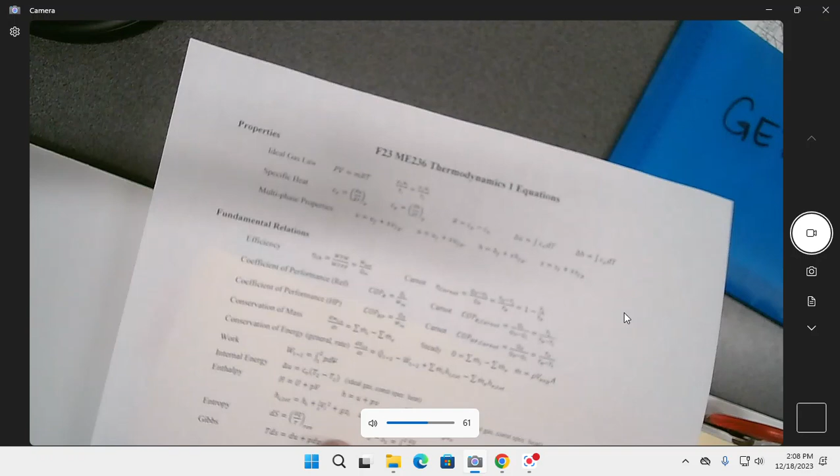So this is what I'm referring to right here. In enthalpy, we have H is internal energy plus this PV term right here. And...

We don't really, we just call that a type of work that's taking place, like flow work sometimes. So for an open system, we go ahead and use enthalpy because it's internal energy plus this other thing that's taking place, pressure times that volume change. It's trying to put it into other terms beside what I've already stated right there.

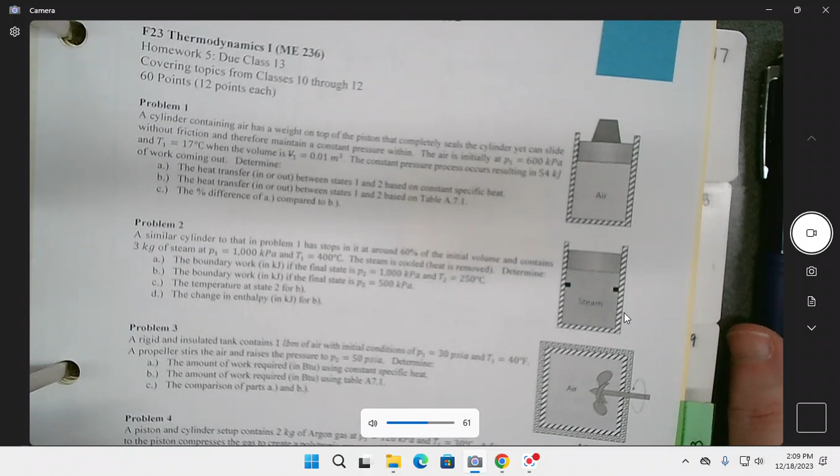So if we go back to, I actually put these up here for a reason. Okay, so I'm going to jump to homework 5. So homeworks 5 and 6 - I tested on some of these on exam 2, and we could also go over exam 2 if you'd like. Might be a useful portion of our time.

But these are all closed systems. You wouldn't use enthalpy for any of these. You'd use that first law, the closed system first law right there. So make that big enough right there. Change in internal energy is going to equal the heat that's being transferred minus the work out, right? So there's heat in and work out by definition in terms of their signs.

And here's the end state and the initial state, and that's true for all of these problems. So when you recognize that, it's part of the problem being this type of nature, you go through that. And then I just did a problem like here.

I didn't have a single person approach this problem correctly in homework 9, I think - maybe it was homework 10, it was where we were doing the generation. Do you recognize what's special about this problem, about what happens here?

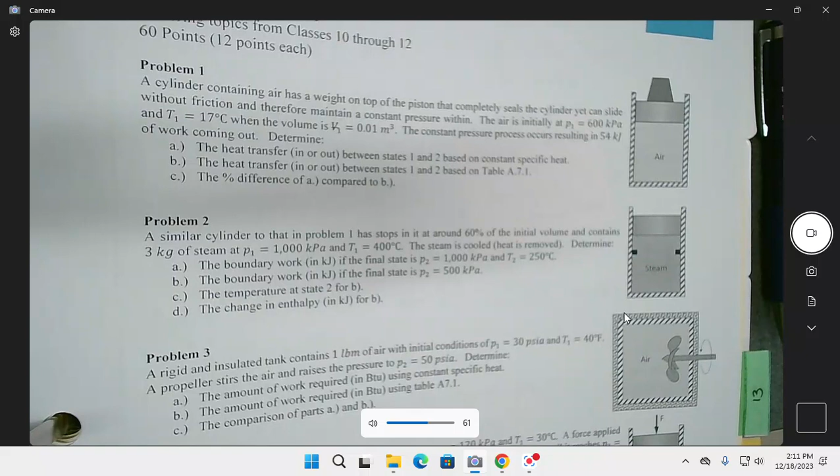That's got to be 2 stages - this piston falls down. Because the piston's there, it's free and it weighs something. We don't know what it weighs, we don't care. We could set it up so we would have to find out, but we don't know. What it does is it causes a constant pressure because its weight is the same all the way as it's moving downwards. It could be that you were holding it and then you let go and the thing starts rising up, but almost all these problems are that we were holding it and let it go, and its weight causes it because it has the same force, the weight doesn't change, and it's got the same area, so it's got to have the same pressure, right?

I hope that, because there's been lots and lots of problems like that along the way, like the same one with what it looks like up here. But now it's got to stop, and so it comes down to right here, and it hits that, so it was a constant pressure process till it gets there. And now if something continues to happen to it, it's a constant volume process. So you've got to do it in 2 stages, right? That was something I thought we did enough of that people would see, but so.

And when I'm writing an exam, I am not going, this will show them. I am like, I want to see if they're able to do this. Like, can they demonstrate their ability to solve a problem right here? And when no one solved it yet, I want to say, hey, don't do that, and then measure it again, right? So if I was going to tell you, I haven't made a decision, but I'm telling you how my brain works. You don't really want to know, but yes.

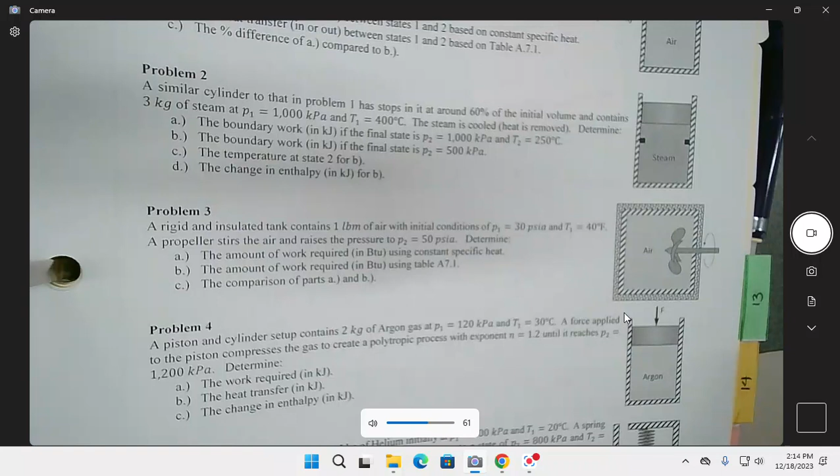But yes, it's pervasive. It's everywhere. So that's my reasoning for the U.S. units, but I won't try to mess with you too much because U.S. units, as I agree with you, they suck. No way around it.

A problem like this, that linear spring in combination, is not a constant pressure problem anymore because the force of the spring changes as it moves down or up. And therefore, it changes the pressure versus volume into a linear pathway. Right? So we're looking at processes all the time. That process isn't really on here, but you could have a linear process between pressure and volume. That's not too bad because usually you could just think of it as the PV diagram and find the area underneath the PV diagram.

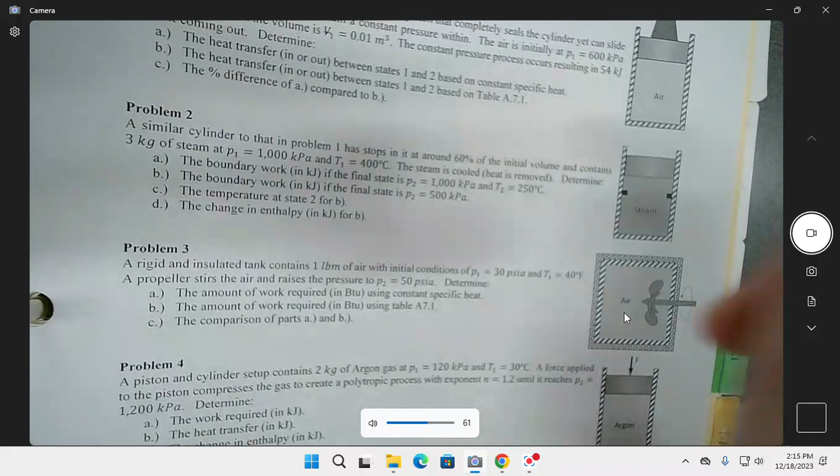Thinking through the TS process would take a little bit more effort. We're not going to go beyond the scope of what we've done in the homework. Well, except to say that we didn't do every single combination of these things that are possible. But I'm not going to try to go too crazy on reinventing some new damn thing at this point.

All right, so compare that homework, which is 5, to homework 6, which I labeled here. And here, if you remember, I wrote out a list of the different things. And these we might think of as open systems. And those open systems are covered with this right here. And then sometimes we extend that total right there. It's not all the time, but only when the magnitudes of the other components are large enough, as we mentioned before, to have the velocity involved. And generally speaking, we're not going to worry about the potential energy changes, not a lot.

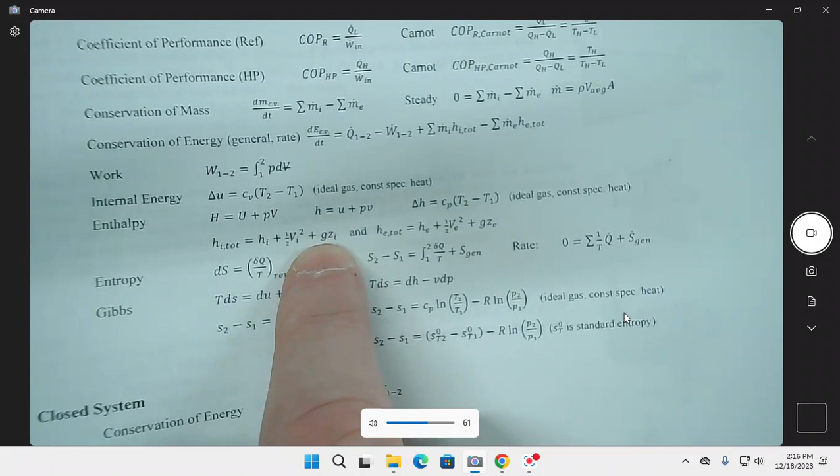And we've even had some problems where I think I showed that the velocity was just a tiny fraction of what the thing is. So most of the time, we write this down right here, and we don't include the velocity in there, unless the velocity is really large and is sort of the point of the thing. So that might be true for a nozzle or a diffuser, right?

So the nozzle or a diffuser, generally, this one's going to be much larger than this one, and it's by the square, right? It's velocity squared. So the velocity might matter right here, and the same thing is true right here. But it might not even matter here, and a lot of times for diffusers, they just say this one is so much larger than that one, so we just don't even worry about it, right?

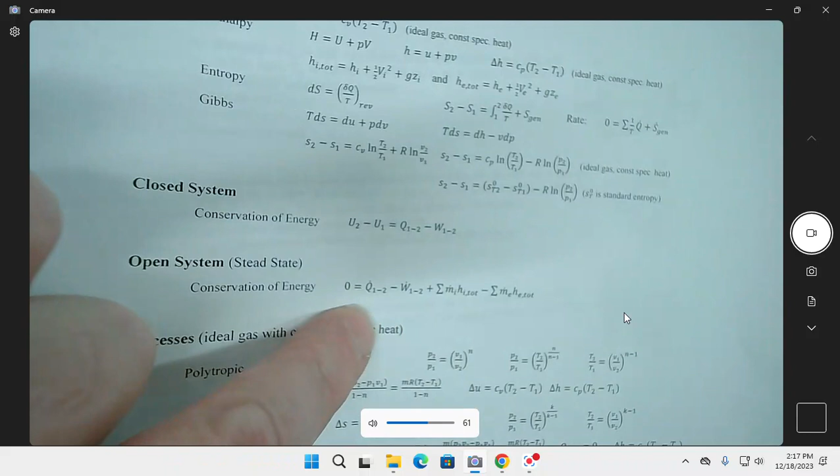But this is the main equation right here that we're going to use when it comes to these pieces of equipment. Velocity might matter here, except that most of the time for a throttling problem, we'll pick the points far enough away from where the velocity got really high so that it doesn't matter.

And then the idea most of the time for a throttling process, and I'm bringing this up because it will come up again in Thermo 2, you'll have different pieces of equipment, especially in a refrigeration system. The valve that makes it go from being a high pressure liquid to a low pressure gas is a throttle. And that throttling process is really important. But it's an isenthalpic type of thing that you'll find later on. And then heat exchangers, but we pick those up in the next one, right?

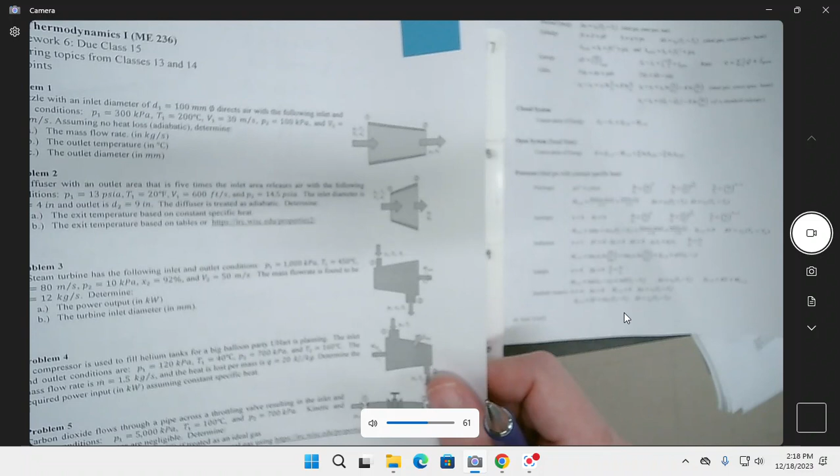So 4 is important. Homework 5 is important. They're all important, but focusing on 5 and 6. And those are what exam 2 was really mostly about. I think also we had some stuff on homework 7 as well. Yeah, we had stuff on homework 7, so so far we have 5, 6, and 7. Those homeworks being very important.

Once again, here's another heat exchanger. I don't think I asked you about a heat exchanger. I'm tempted to ask you about a heat exchanger problem. I don't know if I asked you about a mixing problem. They're not as important to me, but this can be something. You'll get a lot of stuff in heat transfer with the mixing problems and that kind of thing. But you'll dive in and figure out what's taking place inside here.

We also did cover, I just want to mention, heat transfer, which I think was one problem somewhere. And I'm not asking a purely heat transfer problem with the coefficient of thermal conductivity and that type of thing. That is the class heat transfer. It covers a whole lot.

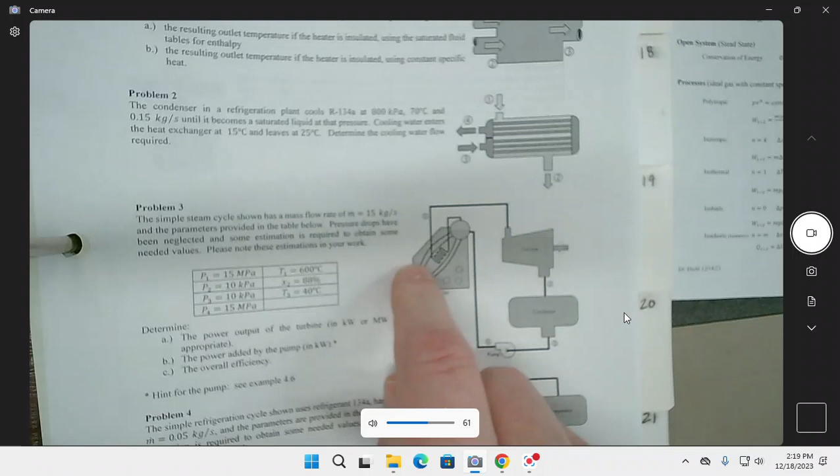Not sure if I'm doing a cycle or not. It'd be good to be able to do this, but of course you're going to go into these, like a steam cycle and a refrigeration cycle. I did notice that people got confused. I'm jumping the gun here. I was kind of surprised how many people, when I asked you for the Carnot coefficient of performance, wrote down the thermal efficiency. Big difference. So let's make sure we cover that. So I probably will ask that. I'm jumping ahead a little bit, but that is something related to this.

I don't think I'm going to ask anything about these problems right here, which is like a transient problem. This is sort of like a combination of this one and this one right here, but mostly what we end up doing is this type of thing, even though there is flow going on there. So it sort of belies the thing I just said before, but not a lot.

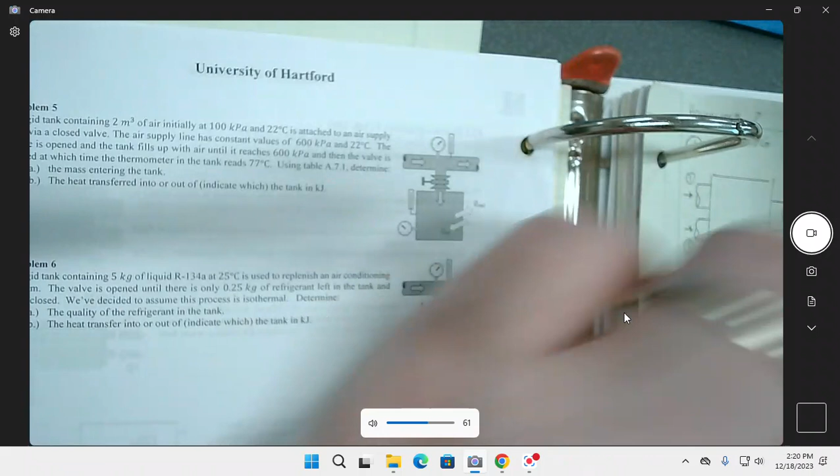Homework 8. All right, so here's one where we start. This is stuff that was after exam 2, and these were supposed to be pretty easy questions, right here.

That's out of focus. I hate that. This thing doesn't focus well. It doesn't have a button to hit focus.

Where I'm just taking the high temperature and the low temperature, like the high temperature here and the low temperature there, and finding what the Carnot efficiency is going to be, and then using it backwards. I think people did okay, but here they got a little mixed up on this one, where we do the coefficient of performance instead. They're similar, but they're different.

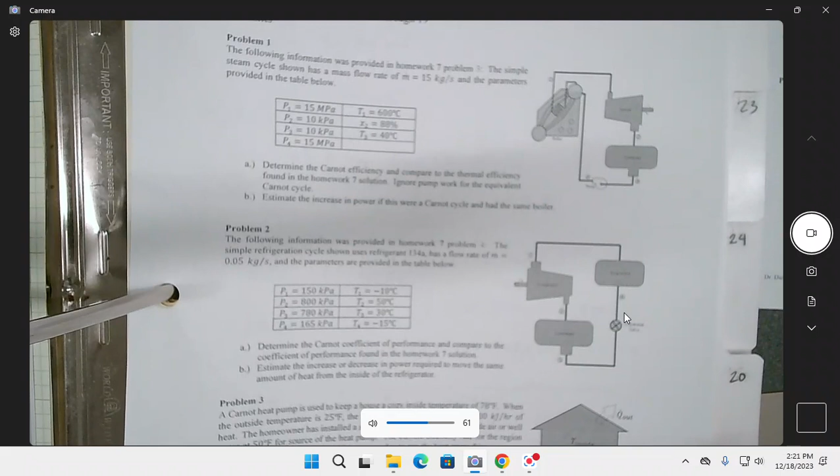And then I thought this was a really good problem, and only a couple people got in the range. But the selling point of this is where rubber hits the road, real practical kinds of things. This isn't the kind of question eggheads ask that nobody will ever use.

This is something that you'd really want to know if you were going to try to save some money on your house heating. You go, okay, here's how much electricity costs, and here's how much power you would use trying to take heat out of the outside air. How about digging a well instead and drawing it from there? You could save some coin.

It was close to half, or maybe it was even more than half of the money. And I also say this is like $1 per day kind of thing. People were like, wow, I don't know, you guys need to pay the heating bill at home or something. Some of you think that you paid $28 a day to heat your house, and you're going to go broke. You'd hope it would be in the $2 or so a day range. It's a lot of money anyway. But it's also a good learning experience: if a numerical result that you get doesn't make any sense, you probably did something wrong.

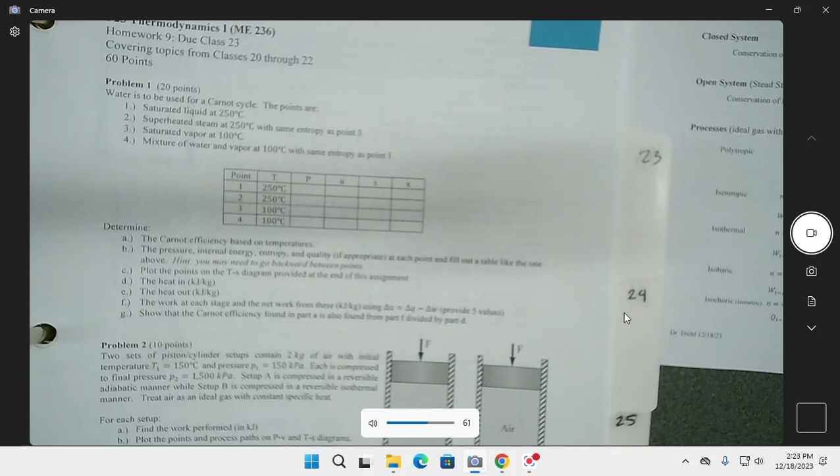Here was some entropy generation. I think I might include some entropy generation on there. I took a look at Dr. Yeverster's final exam. Must have been a take-home exam, like way longer than mine. But some entropy generation things, which is more like homework 9. Well, no, this is homework 9. Yeah, so we could go over some of these or some ones that are like these.

It's hard to pick out some problems out of the book. I spent a lot of time picking and writing these problems so that they wouldn't be impossible to do, but they also wouldn't be one line. There's no partial credit in a one-step problem. You either get it or you don't. So anyway, is any particular homework problem jumping at you that you'd like to see? Have you looked over your homework problems and gone, I just don't see why I didn't get that right?

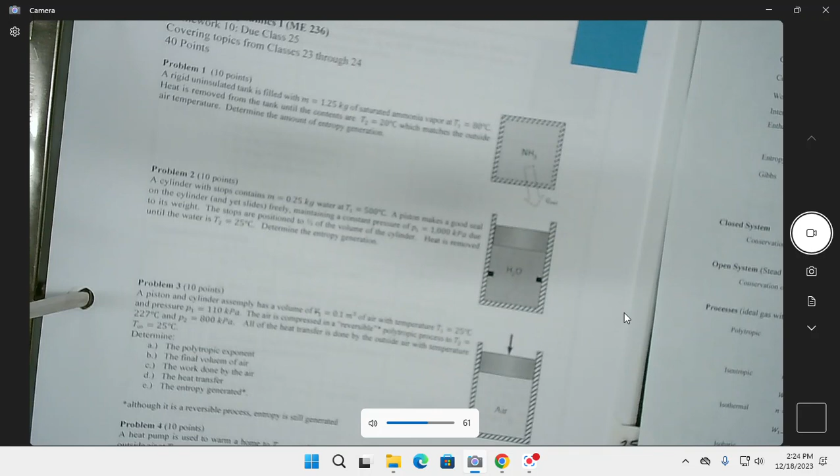Okay, do a Carnot. Can we? You want to do one of the ones out of here, or ones out of the homework? I guess we'll just take a look at what we had as the homework. There's a particular homework I'm going to look at. So let's take a look at all of these really quick. This is homework number 8. So let's see what I do with the time. Did I waste a half hour? Probably 20 minutes.

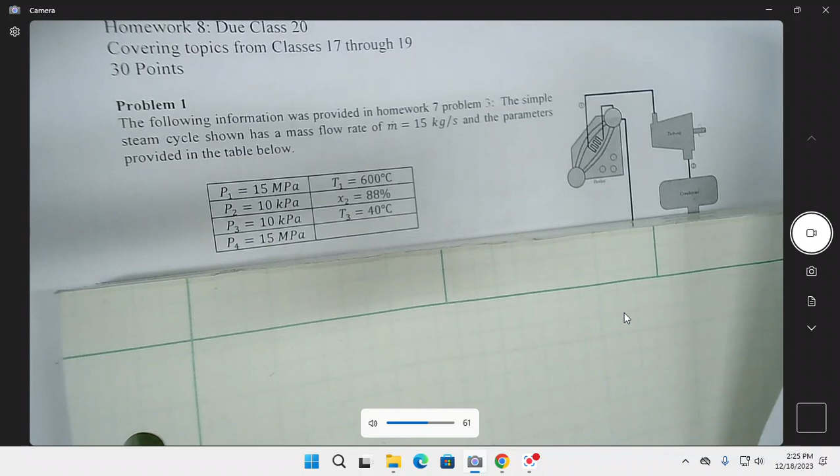All right, so what we had was a steam cycle, and I reminded you of the pressure and the temperature. But remember the main equation for Carnot efficiency. I thought I put them in here. Yeah, there's the Carnot efficiency. It's still going to be what you want over what you paid for, and that's work net over Q in. That could be dotted, or it could be a lowercase w and lowercase q. It doesn't matter; if you had the same mass flow, it would be the same thing.

But for the Carnot one, the work is really the difference between the high temperature and the low temperature. So that's actually the same equation, except now we use the thermal equivalence, so we call it a temperature scale. By the way, homework problem 1 on homework 9 really demonstrated that this works. In part A, you just jump to this equation, and the algebra works out to 1 minus the low temperature over the high temperature. Make sure this is in Kelvin, or Rankine if you're in U.S. units.

Then I had you go step by step through the isothermal process, isentropic process, isothermal process, isentropic process to complete the square, the little rectangle. And I even gave you a little piece of paper to do it on. I don't think a lot of people scanned that and turned it in, but I decided not to take points off for that, though it was in the instructions. Anyway.

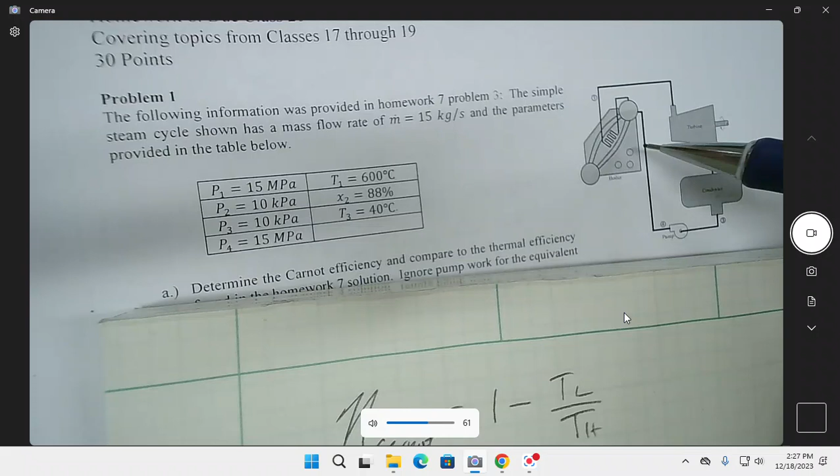We're not as efficient when we go down closer to the equator. But during really cold winter, we get a more efficient plant. You can't really tell, but it is. And then we have the high temperature right here, which is going to be right out of there. So you're just going to be 1 minus whatever that is, 40 plus 273.

I'm sorry about this. Let me pull it back a little bit. There you go. And then the 600 plus 273. Oh, that's what I was going to do. I meant to grab my calculator instead of this stupid thing. 40, 273 plus, and then 600. I should be able to do that in my head, huh? 273 plus minus.

Yeah, so we're potentially, let's see if I can get this even right here. What's like 64.1%. And I didn't do a very good job of that either. How do we do that?

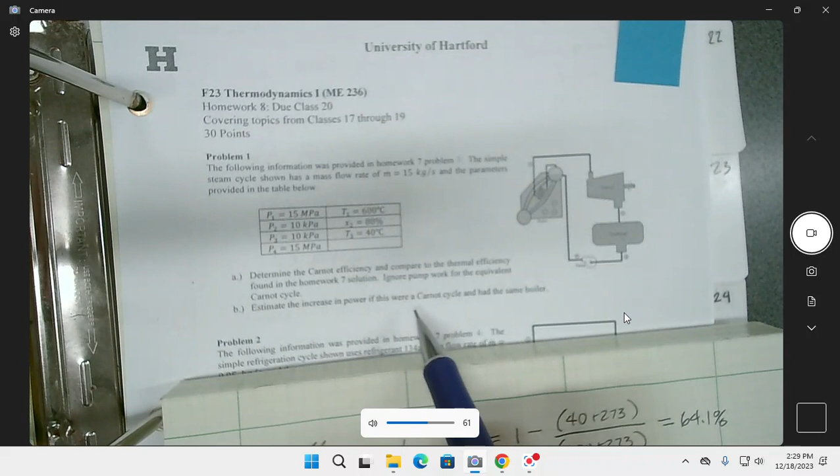Okay, and it was also asking, estimate the increase in power if this were a Carnot cycle. And I think the power that I got out from the previous problems, let's see, I'm going to start taking these pages out because this is awkward. From the previous homework. Let's see, so remember in here we had the overall efficiency. We were asked for the power of the turbine, right? So we had 2.06 kilowatts is how much we would have gotten out before.

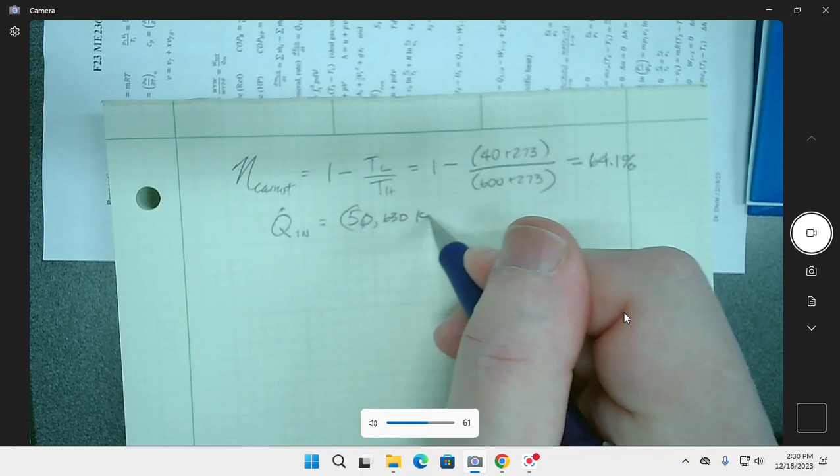And the amount of heat that we put in, if you recall from back here, from the boiler was 50,630, right? So, second, I should have just taken all these out. So the heat in from the boiler was 50,630 kilowatts. I didn't need that bracket right there. So remember that the Carnot is still an efficiency which is going to be work out or net, right? But we're okay with out right there.

So we would have said that what we could get out would have just been 0.641 times 50,630. Or we're going to get 32,479 kilowatts, which was much, much bigger than, let's see, I think I just wrote down, or I said the wrong thing. Oh, I see what I did wrong. I was reading the wrong thing.

Yeah, no, this was the answer down here. We had 19.3 megawatts coming out. I wish that was clearer. As opposed to 32 megawatts right here coming out. So that was the point of that problem. Keep track of that.

This problem right here, where we were asking for the coefficient of performance now of a refrigeration plant. So the coefficient of performance for refrigeration, and this is the Carnot one, ends up being TL over TH minus TL, which I've written down right here.

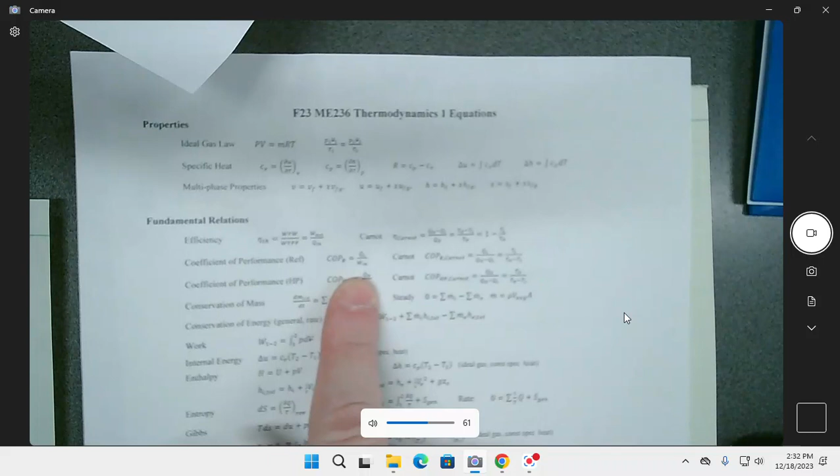The difference between the heat pump and the refrigerator is that this right here on the top is a TH for the heat pump, because that's what we want. We want hot air from a heat pump. We want cold air from a refrigerator or air conditioner. Refrigerator and air conditioner are identical. They're the exact same thing, just so you know. Or freezer, any of those three. They're the same cycle. They almost have the exact same equipment. All they do is change the settings, where the cutoff and that kind of stuff.

So anyway, for this one right here, we have a low temperature that we're coming from. Let me see if I'm saying this correctly, as I'm starting to doubt myself. Where'd you go? Yes. Okay. So we have a low temperature, so it should be the minus 15, and we should have the high temperature, the 50. Right? Yeah, I think that's correct.

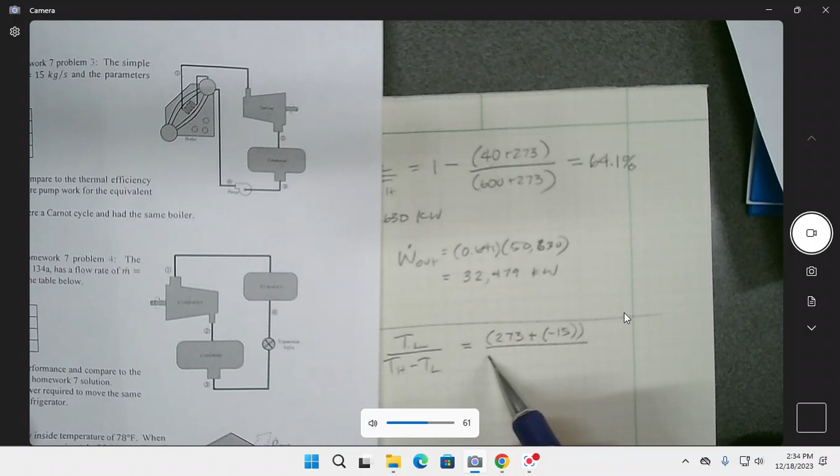But the high temperature and the low temperature, when you're subtracting them, you don't have to use Kelvin if you don't want to. And I don't want to. So I'll go 50 minus negative 15. And what we should end up getting is a coefficient of performance of 3.969, if I did it correctly.

I'm having a feeling I might have messed this one up. Is there any chance I messed this one? You wouldn't remember, would you?

Just give me a second. Why wouldn't I do that? I don't know. All right, you're being a jerk. No, I don't want you. And no one's joined us, so I might kill that thing here in a second. Keep it for the recording. Well, I'm already recording on this other thing, so.

Homework solutions. I have updated homework solutions when I made mistakes. And no, I didn't do that. Okay, I must have been okay. So I was having second thoughts.

All right. So anyway, back to what the homework problem was asking, and so this is the coefficient of performance. The one that I had for the other coefficient of performance, just as the one to compare it to, was like 3.68. So there wasn't really a lot of difference. That's one of the things I was hemming and hawing about. I was like, why wasn't there much difference? It was only like a 7% difference between those. I must have, with the values that I gave you, got pretty close to being a Carnot type of thing.

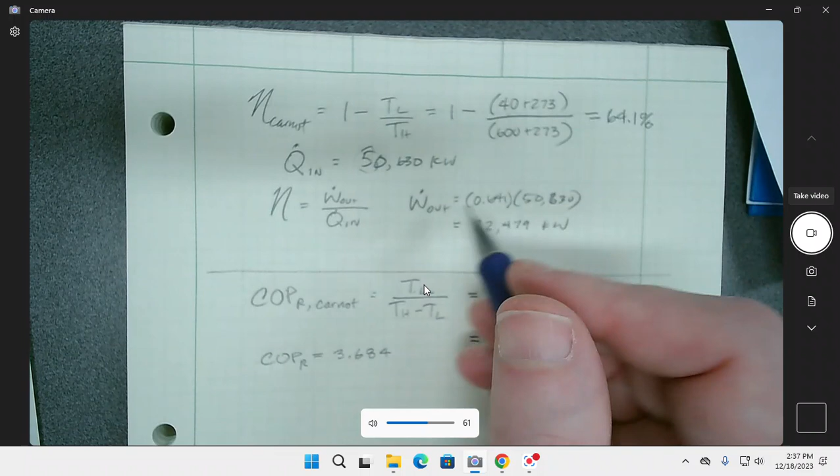By the way, up here, as a means of comparison, these seem like more real values. So just an FYI. Up here, the thermal efficiency was, I lost it again, 37.9%, right? So this is more what I expected. I might have wanted to rewrite the problem, but I dealt with what I had. So the Carnot efficiency was this, but for a real efficiency here, and this is actually a pretty darn high efficiency for a steam plant. In practice, you wouldn't get that.

And then what I asked was estimate the increase or decrease in power required to move the same amount of heat from the inside of the refrigerator. What we would need then is we would write out what a coefficient of performance usually is. Sorry, one second. It's usually going to be Q dot L over W dot in, right? Because we have some electrical motors driving a compressor, and that's really what the cost of using the coefficient of performance for a refrigerator is going to be.

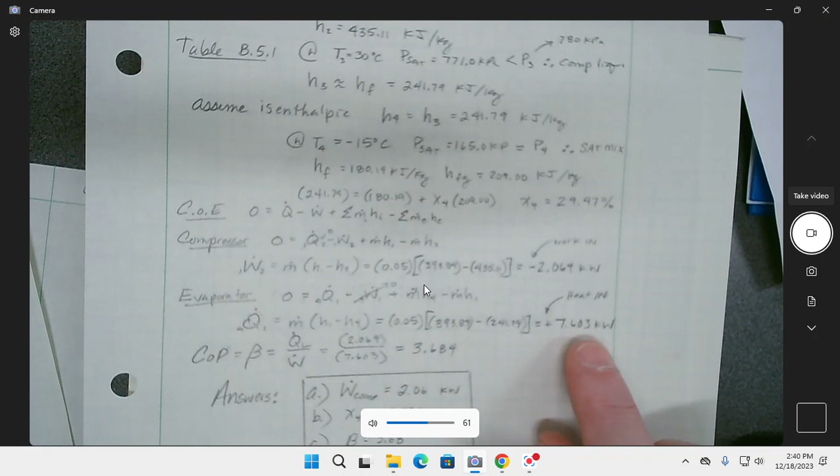The problem was asked for the same amount of heat moved, right? Estimate the increase or decrease in power required to move the same amount of heat. Okay, yeah. So the amount of heat that got moved, that QL, that's what we want. That's not the problem, though. Here's the problem. The low amount of heat, that should have been the 7.6. Sorry, that was it. 7.603 was the amount of heat moved. So for this one, the work in was going to be Q dot L divided by that COP R Carnot.

So from the other solution, 7.603, and that would have been over 3.969, and what we would have had instead now was 1.916 kilowatts compared to the other problem, which we had 2.064 kilowatts. So this was less. I was looking for a way to get you to use this in a practical way, which is to say, okay, here's a steam plant or a refrigeration plant that you've already had a little bit of experience with, and I want you to go back and revisit it, but now just compare it to Carnot. So that was the point of that.

The last one was to use the coefficient of performance for a heat pump as a Carnot. And that one is different by having TH over TH minus TL. And in this case, because this is the thing we want, right? But TL might be something that we can control if instead of using the air outside, we use the groundwater, which generally stays at a pretty constant temperature regardless of what the seasons are. And so that's this equation right here.

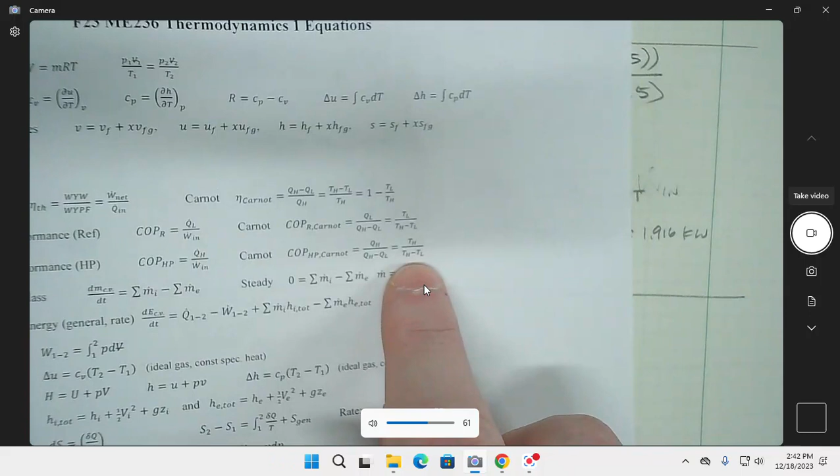And the difference, I know that you have access to this, so I won't write all of it down. In that Carnot heat pump problem, we had an inside temperature and an outside temperature, and we knew how much heat the house leaks. That's how much the heat pump needs to be able to put out if we're going to keep it at a constant temperature. Here was the well water, and here was the outside temperature, which is 25 degrees Fahrenheit.

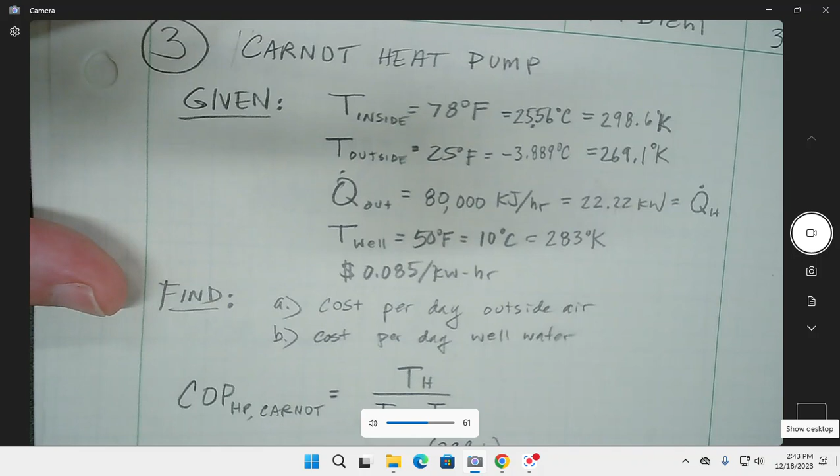That's one of the reasons why I was using US units for some of this, is you probably have a better feeling for what that temperature is than you do for Celsius. When going through that, you could have converted everything into US units, or maybe it was easier to stay in SI and convert the stuff I gave you into SI. I think that's the easier way to approach it.

But here was our Carnot, so we had an opportunity to say, here's what the coefficient of performance is when we use outside air, and therefore we have this many kilowatts to be able to move that much heat. I'm looking at this 22 — oh, I see, I've turned kilojoules per hour into 22.22 kilowatts. So now here's how much power it costs, and here's how much it costs per day to be able to do that with the heat pump.

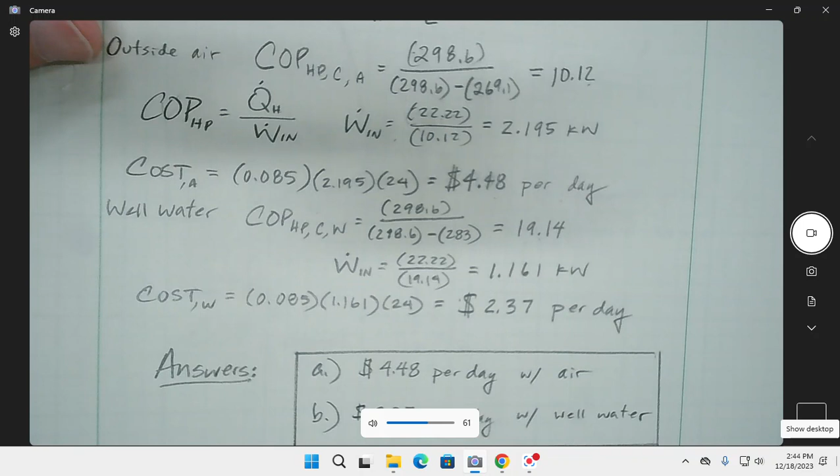But then here's with the well water. You can see the coefficient of performance is so much higher than it is with the outside air. Notably, you can't achieve this coefficient of performance either — these are ideal conditions, right? It's impossible. But a lot of problems similar to this will say this real-world heat exchanger/heat pump has a coefficient of performance that's 25% of the Carnot one. So this is a point of reference.

But you can see how much you could save per day. If you say this is 25% of that, it would still give you the same kind of relative breakdown of cost, where this one is just over half of that one per day. So using well water made a heck of a lot of money savings, and the cost of investment is that kind of important stuff. As an engineer, I have to deal with money all the time, as well as numbers, although they are numbers.

Okay, so anyway, I'm not sure if that was helpful, but I'm going to try to continue with more helpful things. Let's see.

That was homework 7. This is homework 8. I was thinking about taking a look at homework 9 a little bit — we'll talk about some things that maybe were commonly missed.

For the exam, is the concept going to go up to homework 9? We could do stuff on homework 10, but I don't think I would do anything on the fourth problem in homework 10. I think the first 3 problems in homework 10 aren't totally unreasonable, because I'll show you what I mean in a moment.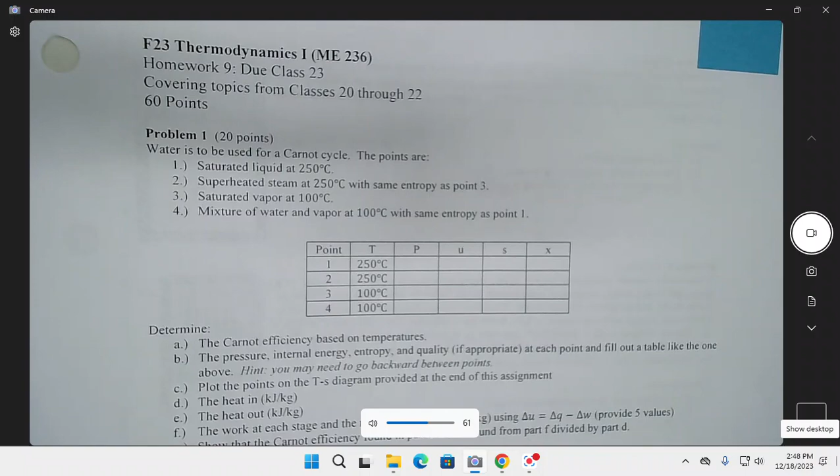All right, so let's see. I already mentioned this problem right here. Now that problem's way too long, but I did see that a lot of people struggled with it more than I thought they would. This is what I wanted - you didn't have to print out in color, but some people just sketched it over to the side, which I decided is good enough.

But I do want you to be able to look through each of these processes, to go from 1 to 2, to 2 to 3, to 3 to 4, right? So this is a heat engine. You wouldn't go in this direction for a refrigerator or for a heat pump.

Going to put me on the spot to try to remember which direction you start on. It's usually at the, I think you usually start down here in your process and you compress. Is that true? I'm trying to remember which way you go right here. I think you go compression up to here, right? And then you cool it.

No, that depends on whether it's a heat pump or not. So this should be the high temperature heat exchange right here because of the TS diagram. You come up here isentropically, then you expand it, and then you cool it right here. So this is where the cold heat comes flowing into the process for a refrigerator, and this is where the hot air gets put out for a heat pump.

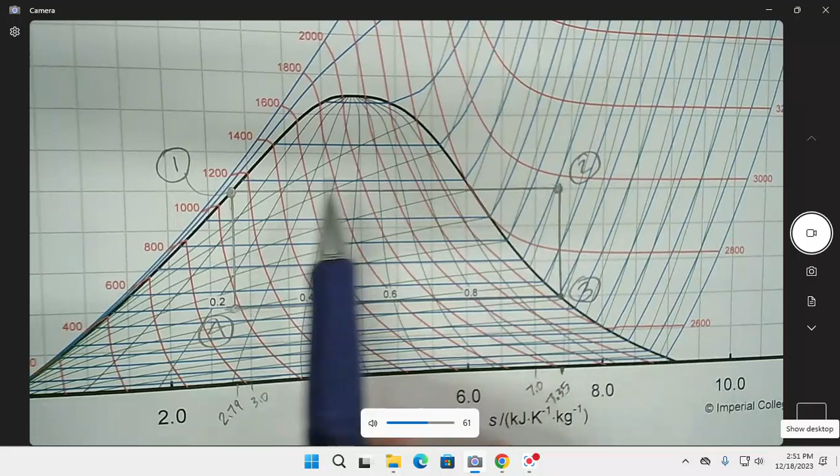And the same thing between here and here, to get the big QH is going to be the area underneath this line right here, all the way down. So it's going to be the temperature this is occurring at times the change in entropy, whether you're going one direction or another, depending on whether it's a heat engine or a refrigeration heat pump.

And you're also able to navigate the charts and the tables to get those values of entropy, but also to apply, for each of these processes, the first law for a small chunk right here: U2 minus U1 is equal to Q1-2 minus work 1-2. So for between states 1 and 2,

we have nothing is 0, right? So even though we already have the heat taking place right here, which is what we found from above - let's see if I did that right. I am being a liar. No, yeah, right here, that's the Q, and I got it from up here. And then you're able to find out what the work was.

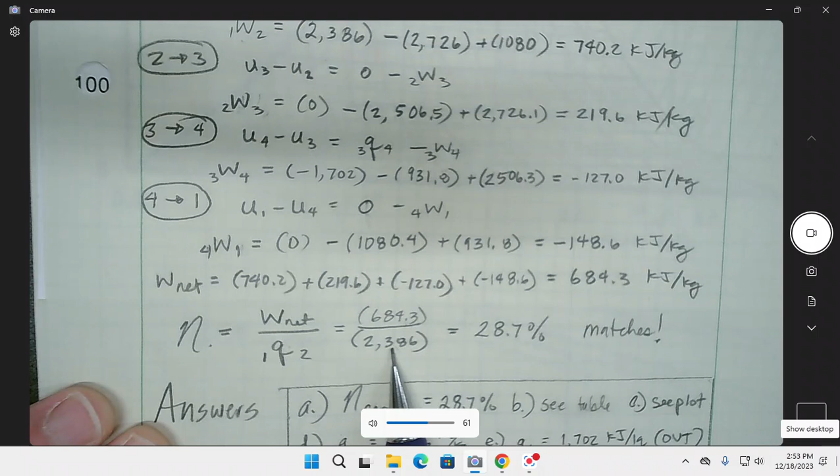And the same thing's true with each of these processes, and you find out what the net work was. So here's 4 different net works that you get from each process. And then you're able to get the net work divided by the heat that was supplied, and get the same Carnot efficiency. So I referred to it before, I talked about it, but I figured I would also show what we had talked about.

So we should be doing some more problems, should we? I don't know if reading through these things helps. All right, so here is one - no, that's not true. Okay, now, okay, so here's coming up with an example of a problem I might ask. I'm going to jump to it, as Alex had asked for - one that I was surprised, and I had mentioned earlier.

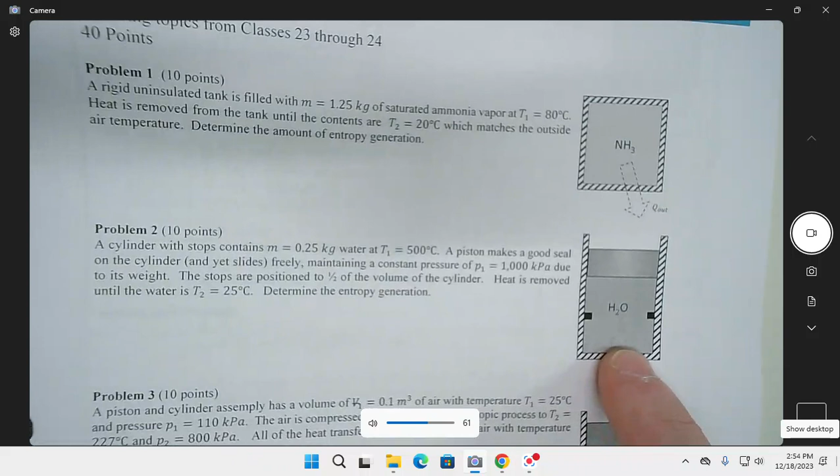All right, so this guy right here. I was surprised that no one got this. So maybe I'm going to work through it one step at a time, as opposed to just showing the solution to the thing.

And this one does have entropy generation. Dr. Yevistruk on his final exam had a lot of entropy generation stuff. And though I know, even though Dr. Milanovic hasn't covered it, I do think it has merit in demonstrating whether the stuff that we've gone over has worked. That wasn't Alex, that was...

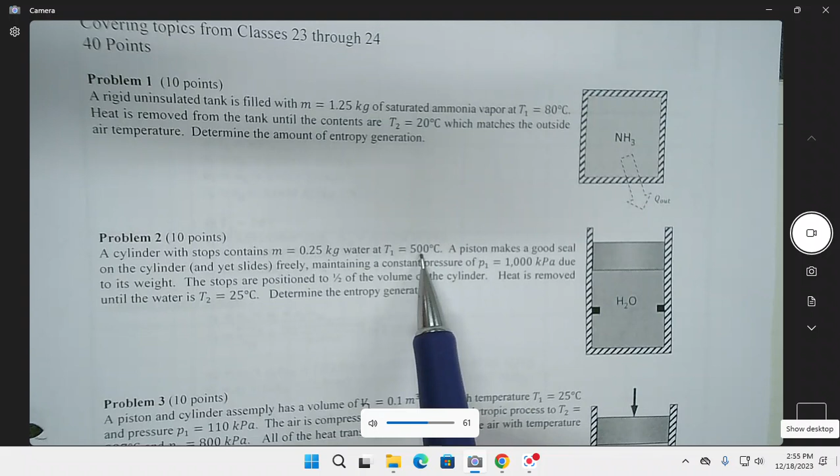All right, so this is problem number 2 from homework 10, where we have a cylinder with stops and 0.25 kilograms of water, and we were given a temperature of 500 degrees Celsius, and the piston makes a good seal. All these words meaning that this thing is going to keep a constant pressure until it hits these stops, maintaining a constant pressure of 1,000 kilopascals due to the thing's weight. The stops are at 1/2 the volume of the cylinder. Heat is removed until the water is 25 degrees Celsius. Determine the entropy generation.

So as we go through this, we don't know for sure necessarily all the things that we need as we're going through, but we can kind of march through and collect some things, and maybe we'll get some things we don't need along the way. But it is a challenging problem. So I'm not judging, but just pointing out that we had some issues.

All right, not to scale. We'll start at the beginning. I'll call it 1.

T1 is equal to 80 degrees Celsius. I also said that P1 was equal to... did I say 80 degrees Celsius? I think I just worked the wrong thing. One second, I was looking at the wrong guy. 500 - that would make more sense. 500 degrees Celsius, and P1 was 1,000 kilopascals. And...

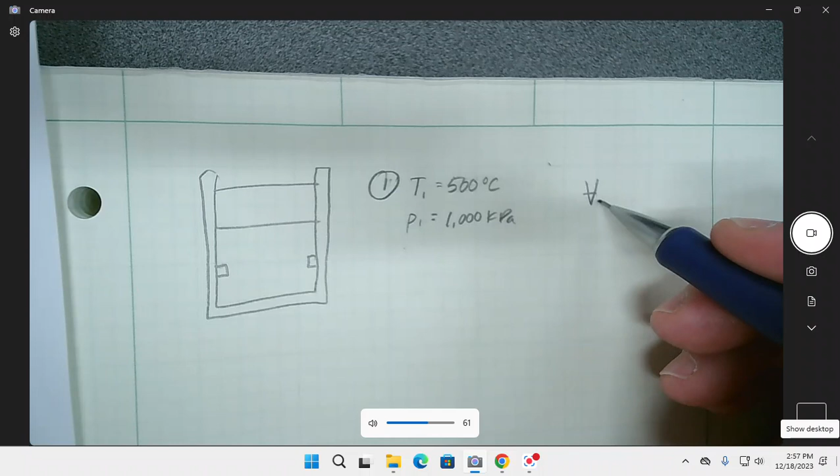Okay, so the V right over the side. V2 is equal to 0.5 V1. Oh, and we also had a mass of 0.25 kilograms. And at 2, T is equal to 25 degrees Celsius.

All right, so we go ahead and from the table, we're not quite sure which it is, but it would be quick to look up. We have 500 degrees Celsius and 1,000 kilopascals. I can kind of guess that's going to be superheated, but we want to double check first, right? And it turns out it is. So that's like B.1.3, and we looked the thing up at those, and we get V1 is 0.35411 cubic meters per kilogram.

And we don't know if we need it yet, but let's go ahead and get U1 because it's a chunk, right? So that's a chunk of mass. There's a good chance we need it. We don't need these many sig figs, but I'll write it down anyway. And we're talking about entropy, so we might as well write down what the entropy of this state is. There's a good chance we need it. That's supposed to be kilogram degree Kelvin.

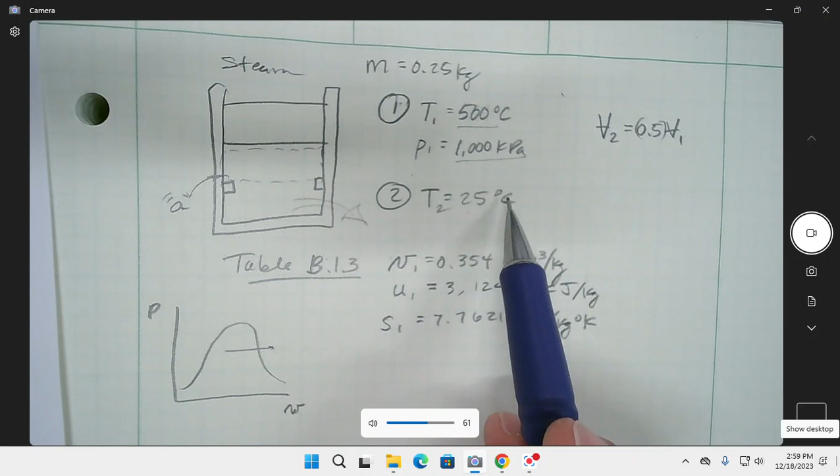So 2 is after all the heat has been removed to get it down to 25 degrees Celsius. But it's going to get to somewhere in here, we're going to guess, going a straight line at constant pressure until it hits the stops at A, and then it's going to start coming downwards. So it hits 2. So that's kind of the idea. Looking at this thing should make you think this thing.

And so V2 is the same thing as VA, because it's the same mass, so we don't have to actually find the volume. We have the specific volume, so that means the same thing. It's going to be 1/2 V1, which ends up being 0.35411, and that ends up being, I don't need a parentheses, 0.1771.

All right, so because we have this value right here, we can look up, and it's a constant pressure. We can try to figure out, well, first off, we're not 100% sure that it isn't still superheated. Maybe this was so far out to the right that it went down. It was getting a smaller amount of volume, but then it hit before here. But there's a pretty good chance that it's going to be somewhere in there, in that range.

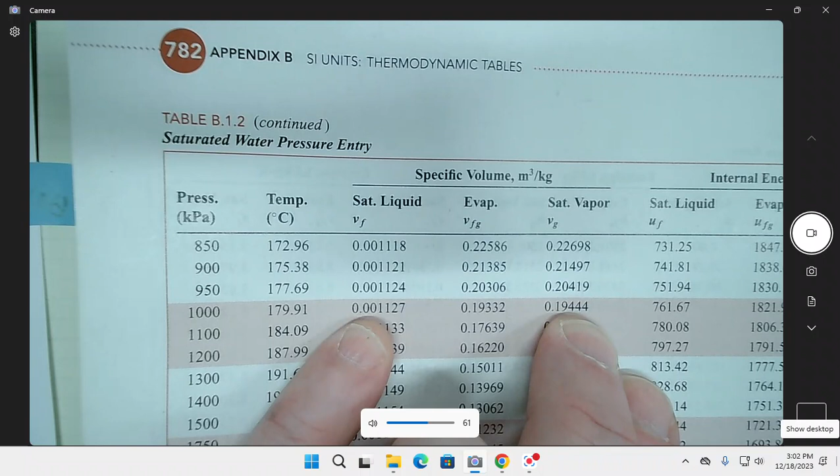So now we can find out what the quality is going to be, right? So we can look at table B.1.3 at P is equal to 1,000 kilopascals. Tsat is equal to 179.9 degrees Celsius, if we want to know that. And from the VF of 0.001127 and VFG of 0.19332, we're able to get,

using this, right? So we're going to use V is equal to VF plus X. Let's call this XA, VFG. So this is going to be the quality at that stage. So here's 0.1771 equal to 0.001127 plus XA times 0.19332. And again, XA is going to be near 90%.

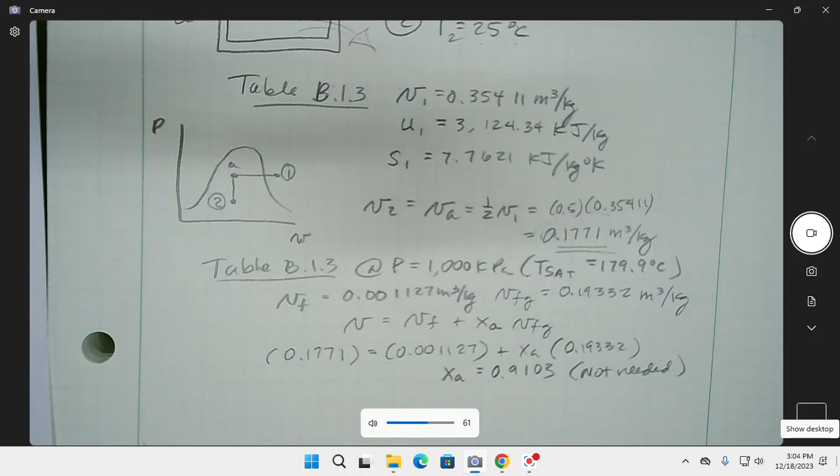Well, wait a minute. Oh, you know, everything I was about to do right now, I forgot. This is like a time waster on an exam, unfortunately. It was a time waster for me when I looked back and reflected. I'm like, oh, I don't actually need these properties. If somebody had asked for them, then I would need them. But this is all just for information, 0.9103, right? But it's not needed, so I'm sorry to waste your time. I just noticed it myself. Not needed, but you could have done it. And you'll see in a second. We'll make sure we point out why it's not needed. And you could have gotten all the other ones, right?

You could have figured out what the internal energy was going to be, and what the entropy was going to be in between these things right here, right? So they ended up being 2,426 kilojoules per kilogram, just using the same table, that same section. You could also have had 6.187 kilojoules per kilogram Kelvin. But still, both not needed. But it is a two-stage. You did need to realize that you had a constant pressure process and a constant volume process. Now, okay, so that was all at A.

So now we're going to go down to 2, right? So what happens at state 2, and it's going to keep on removing heat, so we're going to go back to table B.1.1, and this is going to be at T is equal to T2. It's going to be equal to 25 degrees Celsius. PSAT, by the way, if you care, is 3.169. So this is a whole lot of vacuum going on right there. We do that same thing we just did a second ago, but now we're going to do it at this temperature, at these properties right here.

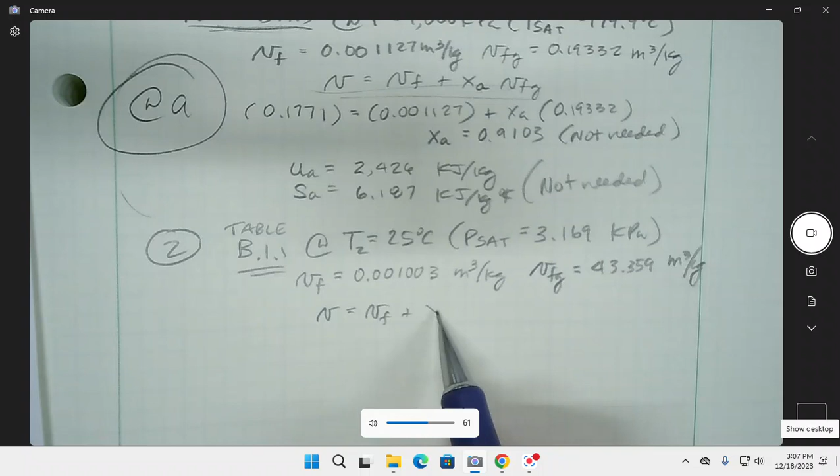So here we're going to use that specific volume along with V is equal to VF plus X2 VFG, and take 0.1771 is equal to 0.001003 plus X2 times 43.359, and find an X2, which is going to be very, very small, 0.004061. This is barely steam at all.

And from that, you can find what u2 is going to be, and that's 1,001. No, not 1,000. It's 114.2 kilojoules per kilogram. And s2 from that same section is 0.4006 kilojoules per kilogram degree Kelvin.

The problem asks for the entropy generation. How much entropy generation do you have? In order to find the entropy generation, maybe you should write down that equation. Where did we go here? Yeah, right here. Okay, so it's this guy right there. Let's write it. S2 minus S1 is equal to the integral of Q over big T, plus S-gen. S-gen's the stuff that we can't get back. It's just the inevitable part of this world, and it's the irreversibilities, the true irreversibilities.

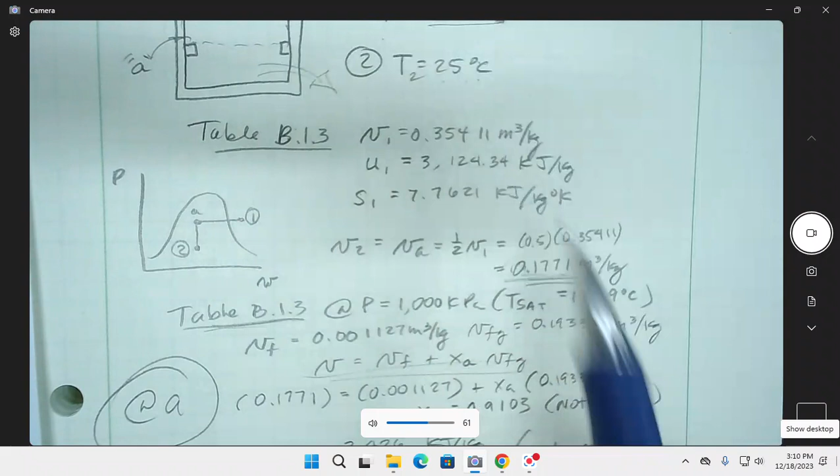We also could find out what the work is going to be, but no work is being done between A and 2 here. Only work is being done because this is a constant pressure thing that takes place in the first stage. So let's find what the work is going to be. I'll do it over here. Work 1 to 2, which is going to be integral P dV, but in a constant pressure system, that's just pressure times volume change, V2 minus V1.

I want to keep the signs straight in this, and we note that this thing has weight, and it's kind of pushing down onto the thing. So the weight is acting on the water, the steam. Therefore, you should expect this to be a negative number, because work is generally going to be outward, right? This is inward. Work is being placed onto the thing. And also, we're using specific volume, so we would really want to write mass times pressure times V2 minus V1. Make sure you're keeping track of your units. They should be able to cancel each other out.

Sometimes you don't need to multiply by mass. I can show you an instance recently, the equation that we were using, where you didn't have to use mass if you used one version of it. But I saw a lot of people making that mistake and forgetting they had to multiply by mass. I'll show you what I mean in a minute, hopefully, if I can remember.

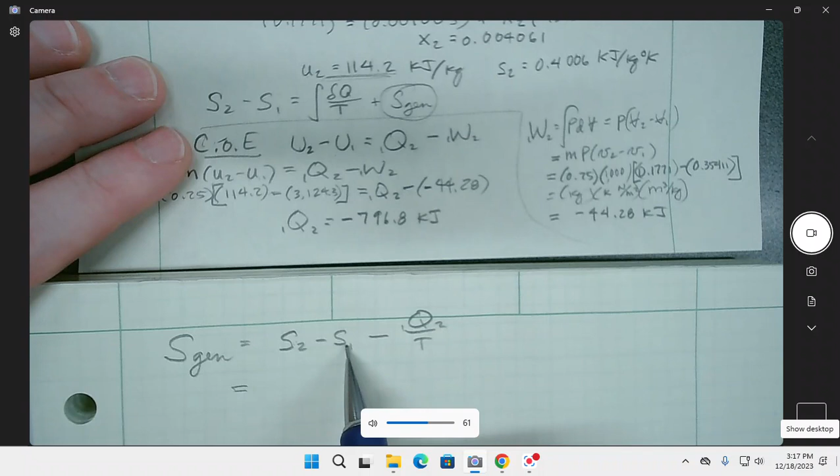All right, so we want to go back to this equation up above, and this is the thing we're looking for. So we could rewrite this: S gen is equal to S2 minus S1, minus Q12 over T. And remember that these are capital S's. We have lowercase s's, so we need to do m times s2 minus s1, minus our Q1 to 2 over T. So that's 0.25 times s2, if you recall, 0.4006, minus s1, which was 7.7621. But then we have minus 796.8 divided by temperature. Here's an important one.

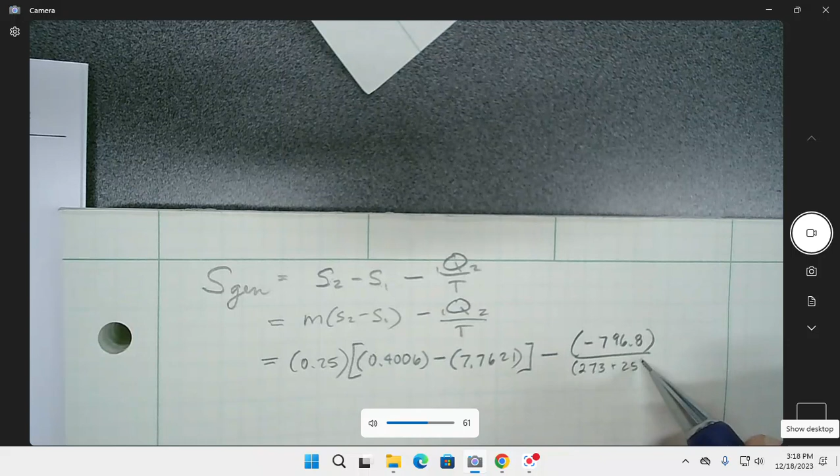I should have used the phrasing for any of these S gens that the barrier of this was also at 25 degrees. In the problem statement it should have said that the barrier through which this heat is exchanged was a particular temperature, because that's the temperature that belongs right here. When the heat is passing through a boundary, that is the temperature that should be in it. So this is 273 plus 25. And this generation should always be a positive number. If for whatever reason it's negative, you messed up somewhere. We should always be generating this.

Part of the importance of this concept is that S2 might be a smaller number than S1 and give you a negative, but then this heat transfer term will return it to being positive. You'll always be generating entropy. So when we do this equation, the T that we use is the state we were going to? In some problems I make it very specific. In this one you had to email me and ask because I forgot to put it on there, or there was a phrase in the original problem saying assume the surface through which the heat is drawn is the same as ambient, which is 25 degrees.

So, yes. But you might recall the heat pump or air conditioner problems where I say the fins of the heat exchanger were a particular temperature. That is the boundary through which it goes. In the last problem from this section, there was an outside temperature, but also a temperature at the heat exchanger. It makes sense because you're always going from high to low. If you want to draw heat from the outside with a heat pump, the surface of the heat exchanger, the fins, the thing you would touch with your hand, needs to be a lower temperature. Touching it is always a bad idea. You should use the back of your hand.

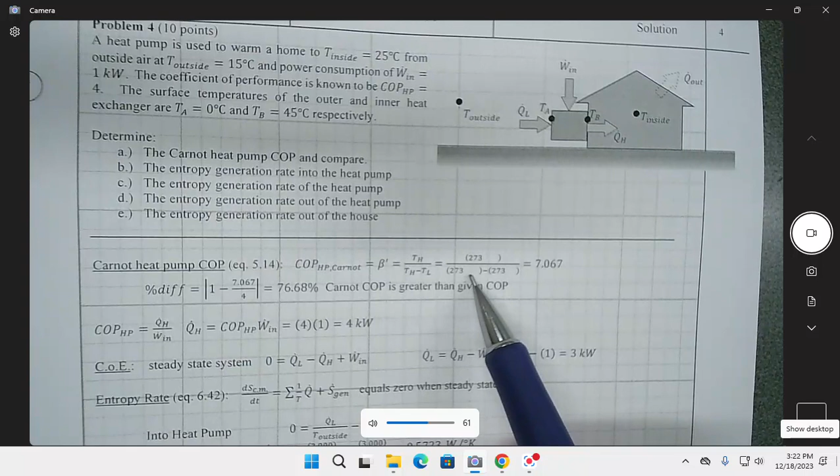Hammer that home. And for whatever reason, Word decided to get rid of the numbers in my Word document right there, but it gets tired at the end of the semester or something, I don't know. And it just will not print these to PDF. It just refuses to print certain numbers. I don't know what's special about them. I had figured it out at one point, but don't know.

But anyway, the summary of this is more interesting than the actual execution of it, because you can now see where entropy is being generated throughout this entire segment, right? So we're taking outside air and we're coming through here, right? So heat is moving from the outside into the heat pump, which I've made look like it was attached to the side of the house.

And work is being put in. Of course, it's not coming from there. It should be coming from an electrical outlet. And then the heat is leaking out, right, into the world. So you could see, if you go through this process, you should have the same QL dot that is drawing from the outside world.

It's being passed from the outside temperature, so looking at this equation right here, you're going from the outside to the inside, okay, and the sign comes from which direction it's coming, either into or out of, right? So this is going into the heat pump, and this is coming out. See if I'm going to say this the right one. QL. Okay, so summarize here, where if heat comes.

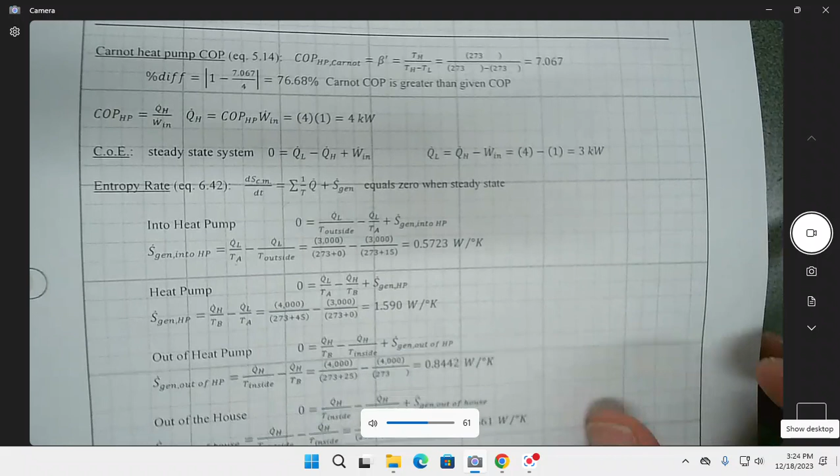What's TA? I just had to name it something. It's the surface of this right here, right? This is actually a lower temperature than this, so I didn't want to call it TL. The surface of the heat pump has to be a lower temperature than the outside air. Otherwise, it won't move. The temperature on the outside has to be a higher temperature. It's from high to low.

So anyway, marching through here, each of these things, you can see there's a positive generation rate coming every time. And did I write kilojoule? I got that right. Okay. And I made these watts instead of kilowatts because they'd get two more decimal places on them. It looks kind of silly. So just making them watts made more sense. But you have this one and this one and this one and this one.

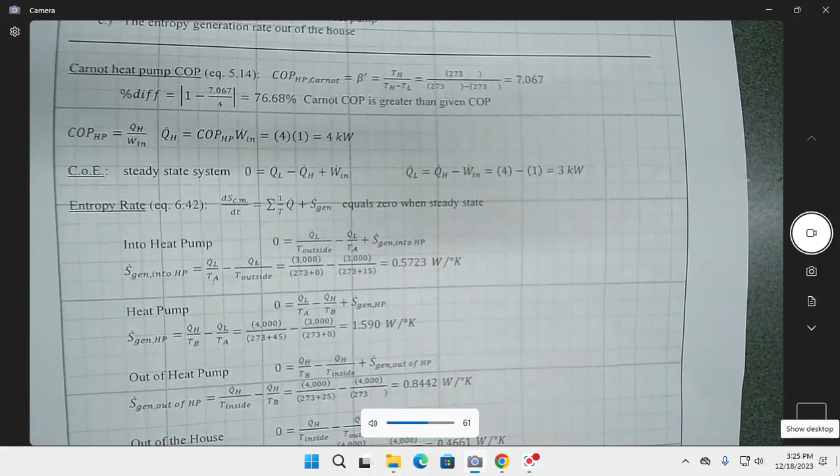I should have asked, what is the total? Because that looks from the outside, from the very beginning, right here. So you have that guy and this guy, right? This is actually coming in and this is actually going out. And when you look at the thing, you get this amount of generation. But if you were to add up this and this, they equal this, right? In terms of the conceptual part, they all add up to the same thing together.

We're generating entropy at each stage of the thing. When we come into the heat pump, we're inside the heat pump, coming out of the heat pump, and then coming out of the house. Each of those heat transfers and processes inside the heat pump generates entropy. And therefore, we've generated this much entropy.

And that's sort of like the conceptual thing that says entropy is always created. Well, here it is. But we can go to the left on a TS diagram on something. That doesn't mean that we've somehow gone negative entropy. It just means we've transferred heat.

Anyway, it was an important thing to me because that was something, after years of being a practicing engineer, I couldn't remember how the hell we got away with that on the TS. And I just went ahead to hit the accept button. And for me, it kind of scratched an itch. It was important to me.

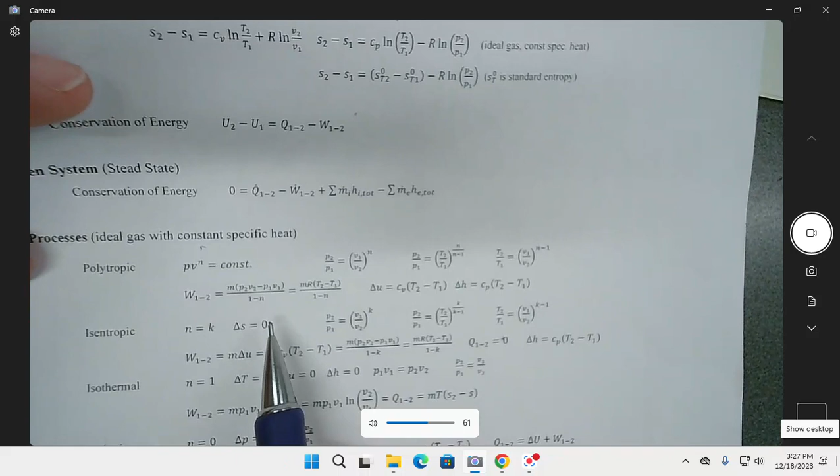So I alluded to something with whether you want to include mass in, or cautioned you about including mass. And it was really about the polytropic, or it was either a polytropic or an isentropic work problem. And before I go any further, make sure that when we're looking at these equations, we look at the context, that this is an ideal gas and a constant specific heat.

But this one, most of the time these are written as capital V's, and if that's the case, you don't need the mass right there. So sometimes we were given a volume, and we knew what the other volume was going to be, and we could find the work directly from there. So do you write down both versions of the equation? No, you just remember the context of what it actually means, what it's actually used for.

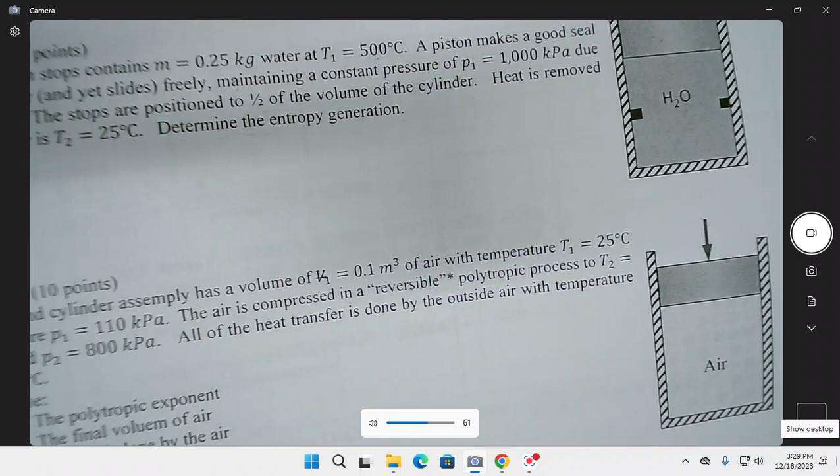So running through some problems that deal with these different types of processes is something worthwhile. And a lot of them are covered in homeworks. Let's see if I say that right. Yeah, there's some in homework 9. So some review of homework, looking through problems in homework 9. And then there was actually one in homework 3, right? I mean homework 10.

Excuse me. So we did that. We talked about this one. This is a rigid one, constant volume. Also in homework 9, we had some. So we had to find the work performed and plot the points. So those are important right there. We have an adiabatic one because it's an insulated cylinder, a reversible process, right? So this was an adiabatic process in that one.

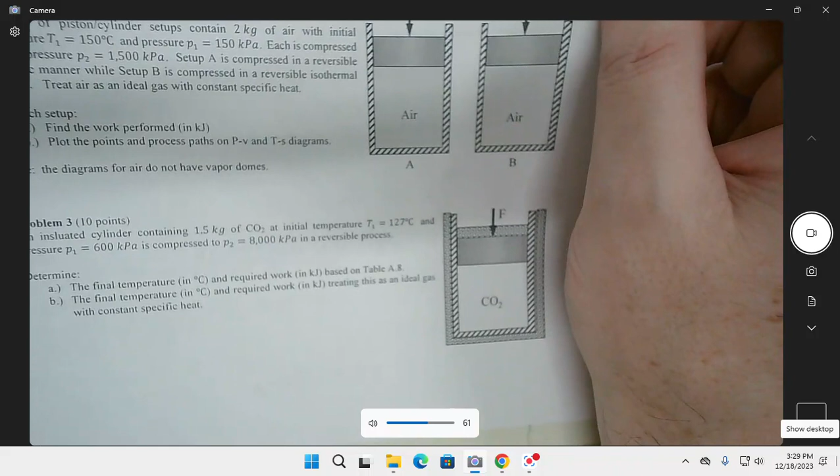All right, so can I take requests? I can just keep doing problems. No? Yes? Okay. I'll just keep doing problems. What's that? I will.

I don't know what's going to be on the exam. I had to do things in a certain order this weekend, and that was the last thing in my order. Yes, yeah. I'm required to get all of my finals done in 48 hours, and I got them each done. I got the grades in. Why are you required to do that? They send me a note that says I have to. No one else does that, but they sent them that same note. I don't walk across the grass.

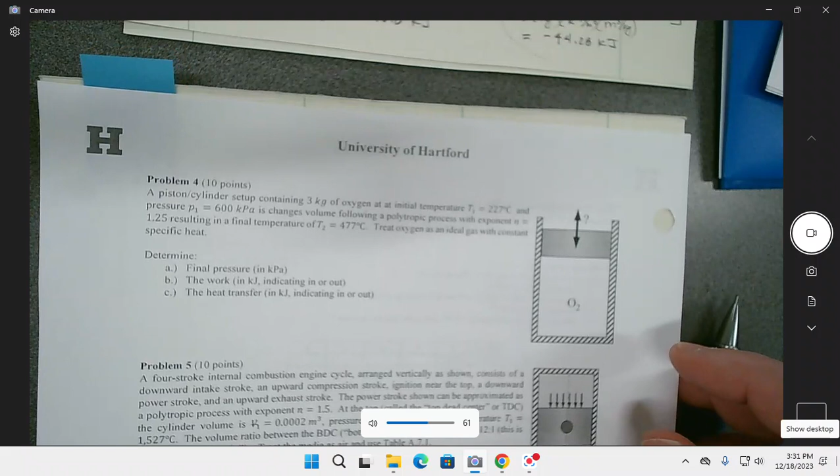But it's against the rules. Somewhere. Not here. At the Merchant Marine Academy. You don't know how much scar tissue that place left. Some things I just can't do. But I can speed. I'm totally okay with speeding. Yeah. I'm a serial speeder. Almost got caught. Did not. Learned my lesson? No. Don't care. You ever got a ticket? No, I have. That's what I said.

I got a lot of warnings. But you cry when you get pulled over? No, my wife does though. She says I'm not a feminist when I get pulled over. She says I'll cry. She'll curse first though. Ooh, that woman's got a mouth.

All right, so let's see. I'll do stuff on here. I'll do problem 4 first, right? Where we had a piston, oxygen at temperature 227 and pressure 600 kilopascals. It changes.

What's up with the grammar? Grammarly let me down, man.

Volume following a polytropic process with exponent n of 1.25. That was one that really bothered everybody, there was a problem where I asked for an exponent of one on a polytropic process, and people just wrote down 1.4. Come on, I telegraphed that. Resulting in a final temperature of 477, treat oxygen as an ideal gas with constant specific heat. We want to find the final pressure, the work in kilojoules indicating in or out, and the heat transfer in kilojoules indicating in or out.

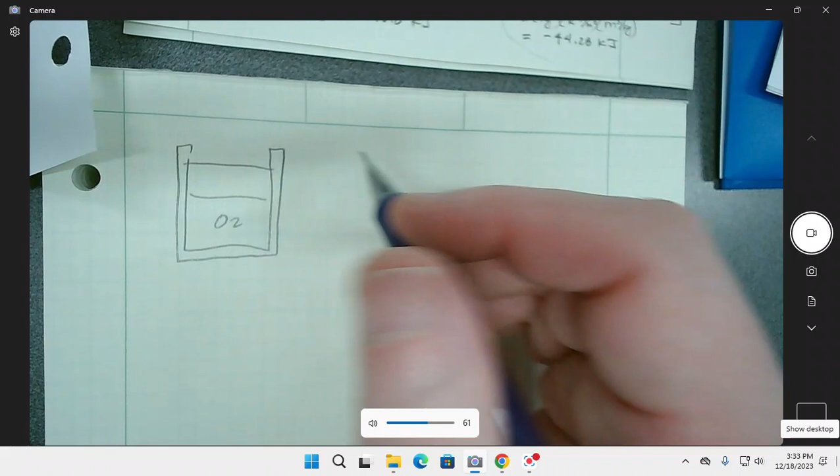I like to write it down, helps me think. While I'm doing it, I gotta tell you, this is usually where it starts to dawn on me what the problem's really asking me to do. All right, so we got 3 kilograms.

We got a temperature 1 of 227 degrees Celsius, which is 500 degrees Kelvin. They told me P1 was going to be 600 kilopascals. They said it was polytropic, so 1.25 is my exponent. And my P1, and I think the next thing might be an unnecessary piece of information, maybe.

No, I just screwed up, I don't know what the hell I wrote that for. All right, so T2, that's what it was: 477 degrees Celsius, 750 degrees Kelvin.

And our find was P2, the work, and this. I don't think I need, I guess it was just a polytropic process. It's interesting, because we covered a polytropic process way back, so this is just redundancy, more usefulness.

Anyway, if we were going to use our equation sheet, that ran away, where'd you go? There. It would help us to remember, oh, a polytropic process.

It has P2 over P1. But we do know. Okay, so we know what the... and this is O2, right? So let's go find out table A5.

We'll find that oxygen is 0.2598 kilojoules per kilogram degree Kelvin, and CP is equal to, might not need the CP. CV might be good for us.

I wonder why I asked this one. Okay, so we'll write out the T2 over T1 is equal to P2 over P1.

N minus 1 over N. You could also reverse this if you want to: P2 over P1 is equal to T2 over T1, where now you have N over N minus 1. Just flip this thing upside down as you're doing the thing over.

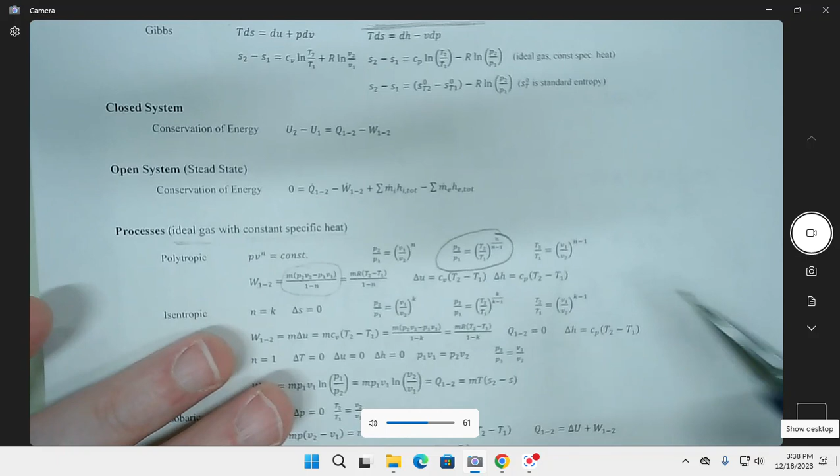We could find them, that's a chance. We could find them because we know the R, and now we know the P and the T for both of them, so we could find V1 and V2. But we could take a shortcut and say the work between 1 and 2 is going to be mass times R times T2 minus T1, over, and be careful of this, 1 minus N. Oops, sorry about that.

And remember the signs, we're going to try to keep the signs correct as part of this. So the mass was 3 kilograms, R was 0.2598.

We had T2, was, I guess it doesn't matter which one, you don't, this doesn't need to be degrees Celsius because we're taking a difference. And, whoops, 1 minus 1.25. So that right there is going to make it a negative.

But that's expected because P2 is greater than P1, so we have compressed it, so work has gone in, and by definition, that is in. Negative is in. And therefore, we were trying to, so we found that's part B.

And part C, we need to go to the first law: U2 minus U1 equals Q12 minus work 12. And so we could really write that out again this way, and these are going to be per mass. Well, actually, we don't, we can go constant specific heat.

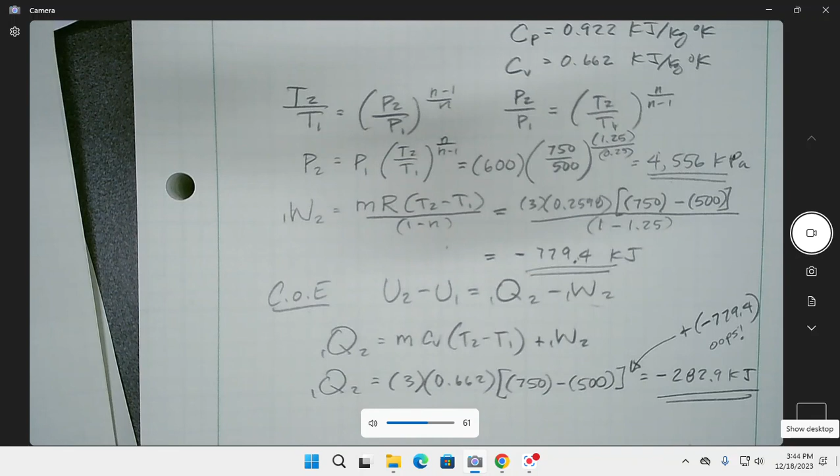Which table would that be? That's like the first one when you enter section A, right? It's in the A section. I'm about to look it up here in a second. So for this one, I think it's table A8. There's nitrogen, there's... okay, so I think it's A9. I think this is right. Well, let me check. It'll be this one right here. Maybe no, maybe earlier. Right, so this is the one where we had the enthalpy, and they have that standard entropy. But I think A8 actually. Yeah, here it is, this one.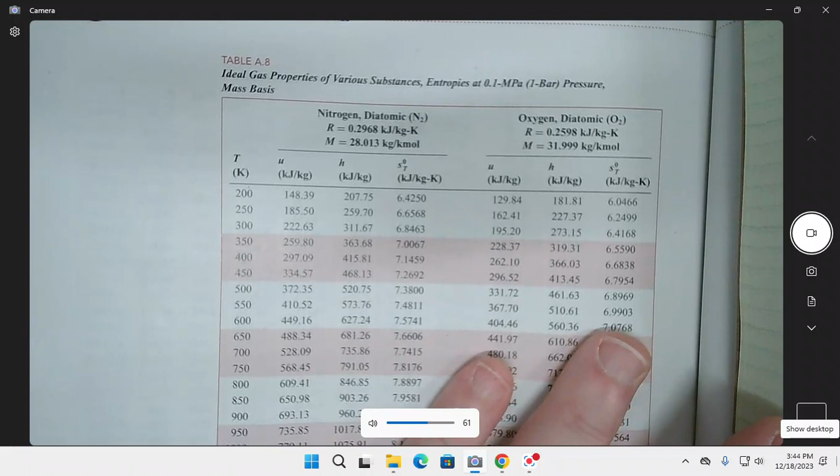So that would be the O2, and we'd be able to get the U's from this. If you did it, because I picked up, what was my temperature? Yeah, 500. So I have, so that's U1 is 331.72, and U2 was

519.02. I might have tried, I was thinking about maybe doing something with the entropy. I'm trying to remember what it was that I'd want to say. There was entropy generation. No, that was only homework 10, right? Homework 10 was entropy generation. So we didn't have anything that was like, find the entropy. We didn't do a lot with entropy in here.

I wanted to use that standard entropy thing for something. Although now with Dr. Milanovic, I'm not sure what she will do. I'd like to see what her exam looked like. I know the 3 questions to look up. Maybe I'll ask you later when we're not being recorded.

6.8969. I know, sorry, this is boring theater here. I tried to be more entertaining. Maybe next semester.

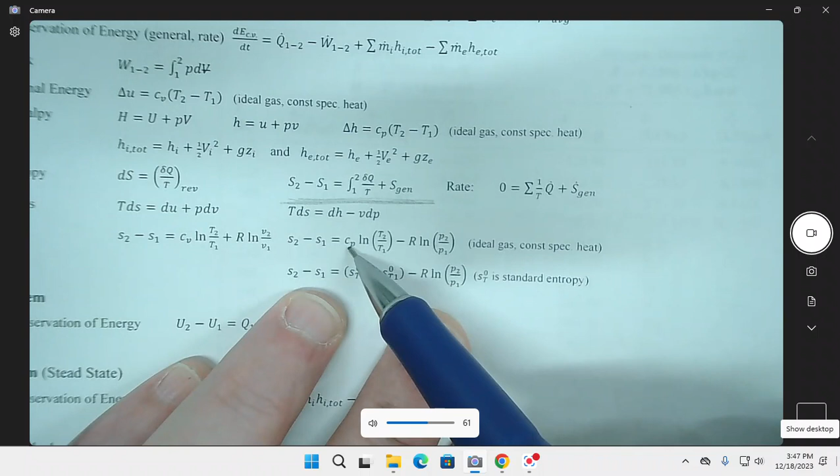Why do you want to use them? Because I know that they're useful, and they might be useful next semester. And I honestly, firmly believe this, that as an engineer, just being told something, maybe they could do it in other majors. Maybe in other majors, when someone tells them the thing, and then they ask them on a test about the thing, that's totally fair. But I don't think it's fair, or that you remember something, unless you use it for something, like you use it for a calculation, then have a chance for it to stick, or then use it repeatedly for something, right? To have some type of use for it. Why bother learning something if you don't use it for something? And that's why we learned about this, but we didn't really quite use it. But you could see, you could find out what the enthalpy, I mean the entropy generation, what the entropy is going to be based on these, or we could use this thing right there, right?

So I think that's what I had intended on this problem. I don't remember, but regardless, let's see. Yes, we're gonna do more. I just want to double check how much of a difference this would make right here, this portion of it, because this is the only portion that would really matter right here.

I might have written that in a solution somewhere. Q1 to 2 was going to be equal to 3 times 519.02 minus 331.72, and then, as I had forgotten to write it up here, plus minus 779.4, just to see what the differences are going to make. 519.02, because I don't have the in-between numbers, I have to write the whole thing out, right? 0.72 minus 3 times, and then 779.

Yeah, so now I get a minus 217.5. That's a pretty big difference between the. So I would say that the constant of specific heat is deviating somewhat from the actual values.

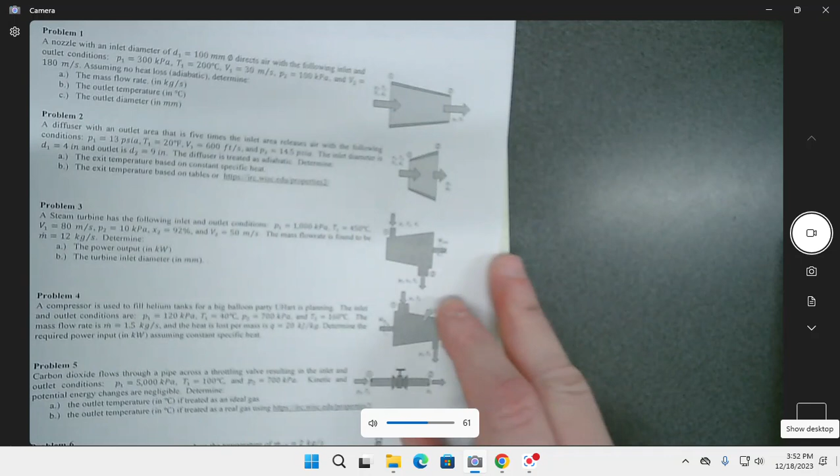All right, so let's say that I want to condense—all right, so I'm going to invent a problem where I have this steam turbine right here, and we're going to figure out what the flow rate needs to be of the water coming out of the condenser from this. We'll find out the water flow rate, if I only want like a 10-degree temperature rise of the seawater. Now, why only 10 degrees? Because we don't want to hurt fish, and we make a lot of hot water. Fish don't like the hot water that we make, so it's like thermal pollution that we've been doing for a long time. So we want to make sure we have enough seawater passing through our condenser.

And all right, so here we go. Let me get the cheat sheet because I want this to be more efficient. So we have these conditions for our turbine. We always draw a steam turbine as if it's getting larger—of course, I didn't do a very good job of it here. Here's the shaft coming out, rotating right here. So we have the inlet at 1 and the outlet at 2, and then it's going to come into a condenser, and they actually sit on top of each other.

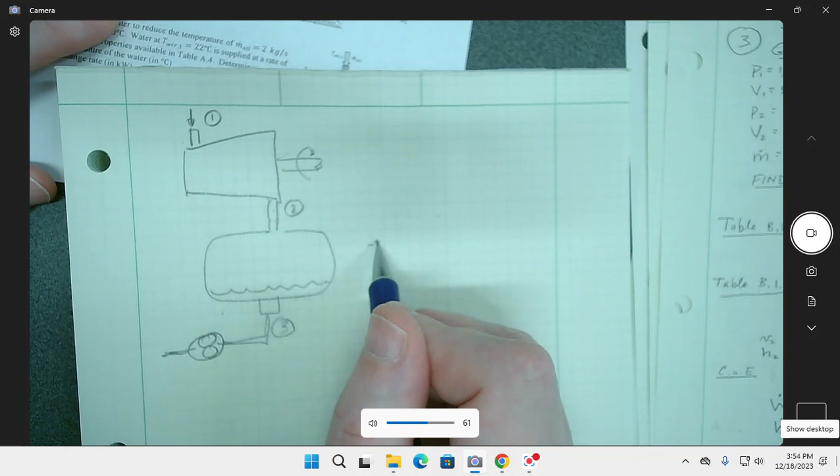See, this is actually what this thing looks like right here, by the way. It's got thousands of little tiny tubes, like that right there. And this end comes off. Also, there's little manholes to come into there. And they stick the cadet inside there with a little air hose with a little valve on it. Little tiny, it comes out.

And I had to push air through each one of these things to knock out all the slime and sludge, and there's little tiny crabs and stuff crawling all over it. And I had to be covered in like a Nomex suit, but then the smell, you just wouldn't believe the smell, and do that for I can't even remember how long. Sticking the cadet inside the boiler, and inside the condenser, that's what's fun for merchant mariners. All right, so.

We already did this problem, but it's been a while, so you would have forgotten it anyway. So we have the pressure is 1,000 kPa coming in. Temperature is equal to, where'd you go? You lost me. 450 degrees Celsius. We can ignore this velocity, or we can relearn again that we can ignore this velocity. It's not very much.

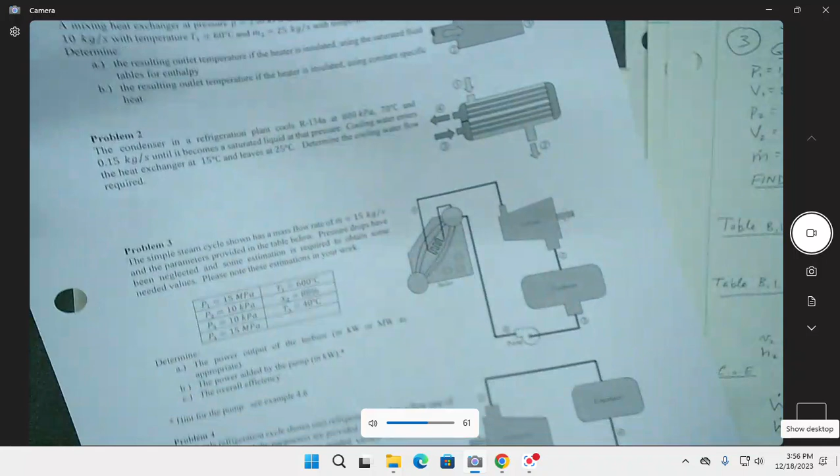Yes, sir. So isn't this more similar to like homework 7? Yeah. It's actually homework 6. Was there one in homework 7 where we did this? Yeah, homework 7 was like the whole isentropic processes. Yeah, but it's similar to this portion of it. So would there be a problem where we have to focus on an entire cycle? No, it takes so much time, no.

If I could figure out a way that I can work through one. Anytime I take it, by the way, I usually try to turn my professor hat off. It's kind of hard to do. I've been wearing it for a while, but I'm pretending I'm a student, approaching it without already knowing what the problem's about. Try to slow myself down, but it's impossible to do 100%. But I think an entire cycle would be too difficult unless I gave you the answers to a lot of stuff in there. I gave you a lot of information, but still, then you have to read it, and that takes time.

Even just reading the thing and recognizing that you don't need to find something can be kind of a cruel trick to be playing. I'm not looking to make cruel tricks. I can accidentally make things that I didn't realize would cost somebody more time to do. But I don't know. It sounds like I'm making excuses. I'm just trying to assure you that I'm not out to get you, just trying to see how did everything work out? How are you doing with the mastery of the material?

So P2 was 10 kilopascals, and we're given the quality, so it's still 92% steam, and V2 is equal to 50 meters per second.

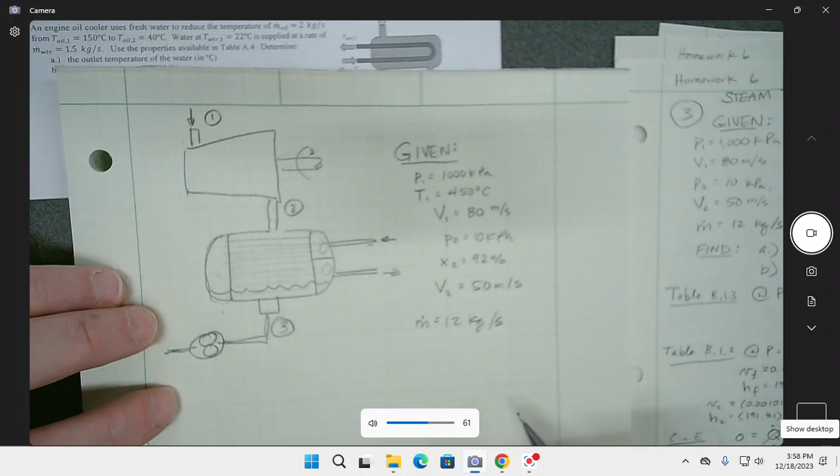So we have 12 kilograms per second. All right, so the things we would want to typically find here, make sure that you could find the power. That guy right there. I don't know if I care about this part right here. I don't care about the turbine inlet diameter. I don't really care. I could also ask for what the diameter of this is going to be, or the diameter of that, either way. So I'm not going to ask that.

I would rather need to know, delta T has to be 10 degrees Celsius of seawater. Now, our first question is seawater even in the book as a property? It's in all of my books, but I went to a different school. Anything else I would need to know? I don't think so. All right, so I want to go for the mass flow of seawater.

So we'll go through this without looking up every damn thing in the book. So you go at 1. All right, so at 1, you'd be able to find, well, let's write the main equation down and then get this stuff. So here you go, put this on this side. So the main equation of what we want, and that would be our all-important first law, and it's this guy right here.

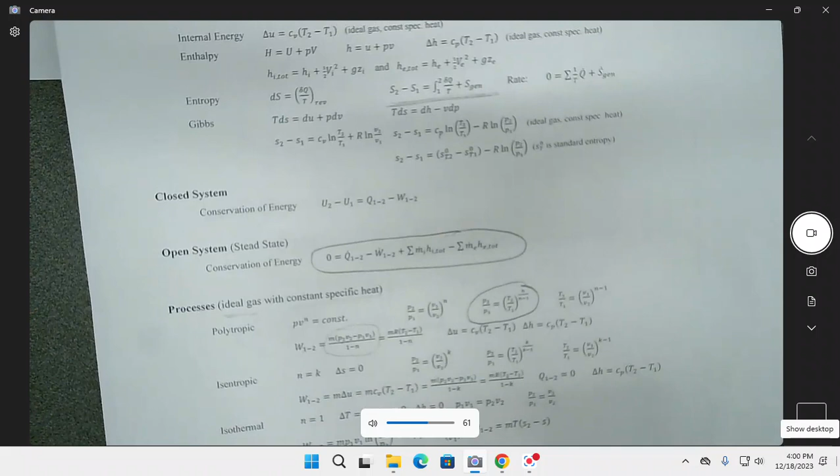Where we're going to write 0 equals Q 1 to 2. Give them a dot. Doesn't matter if you give them a dot; you can leave all the dots off as long as you leave them all off. And we'll call this I and HI. And they said the equation as I wrote it down was like theirs, and I wrote the tot. So m dot h tot.

All right. So we need enthalpy. That was my point right there. We need to find what the enthalpy is at the conditions at the inlet of this thing. So we go at P equals 1,000 kilopascals, and T1 is 450 degrees Celsius. We look this up, and H1 is 3,371.2 kilojoules per kilogram. And we had to interpolate, unfortunately, for that with the value I used.

I'm not sure if I did that on purpose, but if I did, I don't like myself very much, but that's okay. If we were going to go ahead and mess around with the areas of the thing, we would need to know this right here. I'll show you what I mean, or you could see it later.

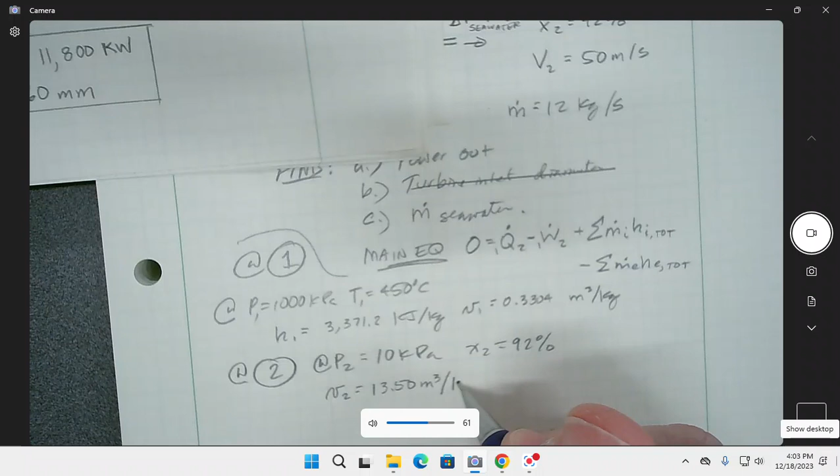Anyway, so we got these 2 points. Then we have to go at 2 right here. We were given the pressure, so this would be at P2 is equal to 10 kilopascals. We would look that up, and using the X of 92%, we would be able to find what our V2 was going to be. I don't think we needed to know it, but it would be 13.50. But what we really need out of this is the H2. And the H2 is going to be 2,393.2.

We might also find HF. And you're going to go, why do we need HF? Well, just trust me. You need HF of 191.81. And so, using this equation up here, we first note that they didn't say anything, or at least I didn't read anything. A steam has a mass flow right here. So what you have to assume from this is the thing is well insulated, so that no heat is escaping the surface of the thing.

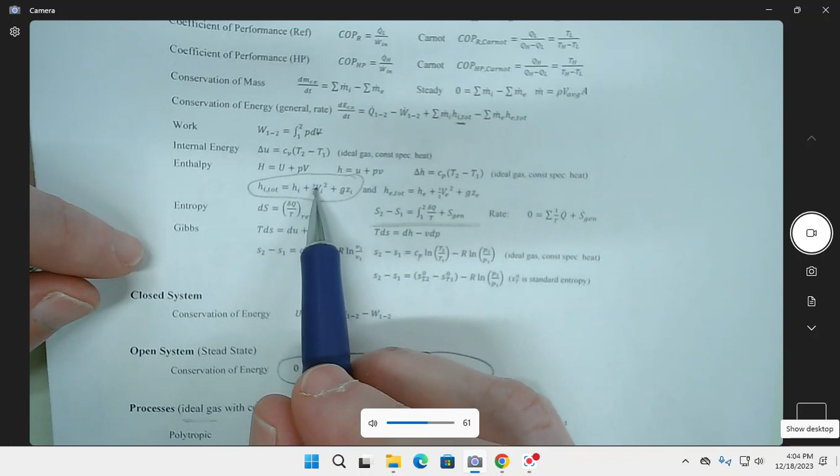So what we end up finding is we have this power that's going between 1 and 2 is going to be equal to the inlet. These are the same mass flows, so we don't need to make the distinction. And that's going to be H1, but this is going to be the total. So we note that this H tot is listed, I have it down here under enthalpy. We can ignore the gZ, but it's going to be plus 1/2 V1 squared minus this other part right here, m dot H2 plus 1/2 V2 squared.

So putting all those things in there, and it said that we had 12 kilograms per second. I'm not going to write out all of these things, but I will point out to you that this has a difference between H1 and H2 of 978 kilojoules per kilogram compared to a difference in the velocities of 1.95, right? So this is like 0.2% of them. So the velocities are often ignored; it just doesn't matter all that much. And the smaller of the two is even more so extra small.

So what we end up with here is 11,759 kilowatts. Oh, I just thought of something. Oh, that'll be good. No. Yes. Just a second. Okay, so that would be the answer to part A. Yay, we got 11,700. But now we want to condense all the way.

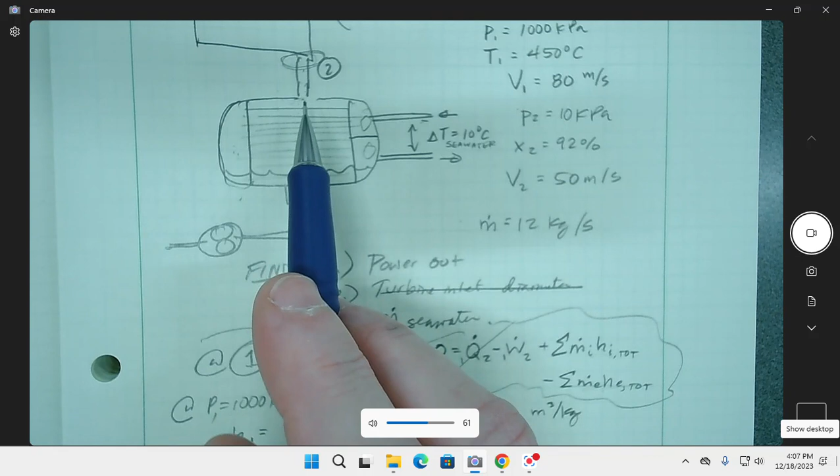So in essence we're going to have the same pressure all the way. We're going to have the same temperature right here. So the outlet temperature that we had right here should have been this Tsat right here. That Tsat would have been 45.81 degrees Celsius. That's what we're going to have about the heat exchanger.

So what we're saying is we're going to use the same law, the first law here, but it's going to be contained inside a condenser, right? So we have in and out, but we're also going to have in and out. And so now we've drawn a control volume around this, and mass flow is coming in here, mass flow is coming out here. Mass flow is coming in here, mass flow is coming out there. So we're using that same equation right here.

Summation m dot h, and these are ins, minus summation m dot h, these are outs. But we're going to say, well, this thing is insulated enough and it doesn't do any work. So what we're basically saying is, and I've got to give these guys names right here. I don't know what to call them. So this is 2 and 3, and I'm just going to go A and B. I just didn't want to give it other numbers, and then I'm going to go crazy with my subscripts.

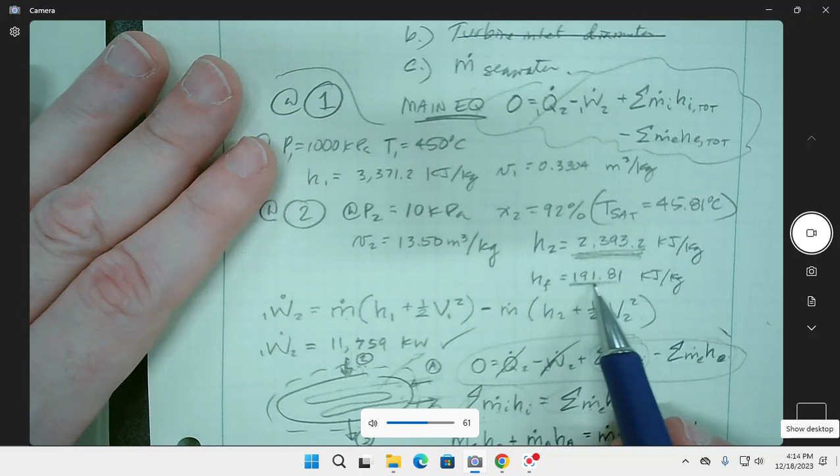Is H3 the same as H2 as well? H3 is not. H3 is right here, because this one changes from H at 2 to H at 3. Okay. Yeah. And H2 right now for us is going to be this guy right here. And H3 now is going to be this guy right here. Why? Because the condenser removes all of the steam, so now it's completely water. So here is the HF from the thing coming out.

I think I could just rewrite that. And we're solving for MA in this case? Yes, exactly. And we should be able to look it up, or we'll pretend

we're in the Great Lakes and just use fresh water instead, because I took a ship all the way from the entrance to the St. Lawrence Seaway all the way up to Duluth. Went through all those locks. It was neat.

So I'm going to see if they do have seawater. That should be table A4. They have water, but they don't have seawater. Anyway. So we're using the specific heat of water in this case? Yep, yep.

So for this, we put in the mass flow that we were given in the beginning, which was 12 kilograms per second, and H2, which was the partially condensed steam at 92% quality. And now we'll have, at that same temperature and pressure, only water, and then this is M dot A that we're looking for. CP is given in table A4 for water: 4.18.

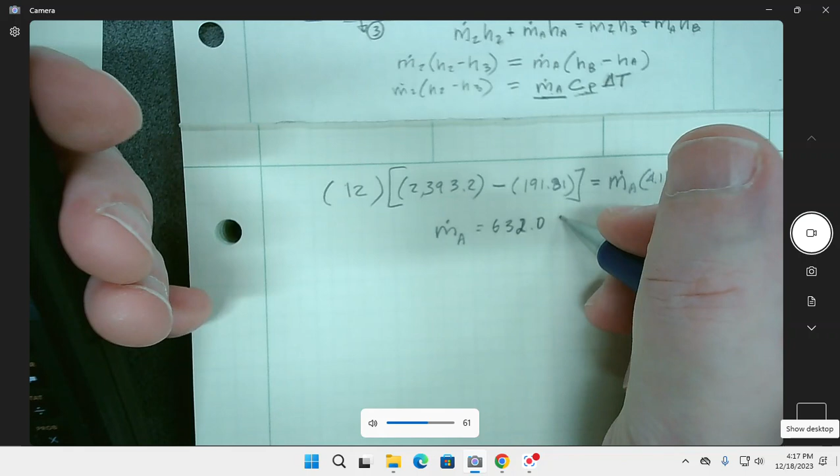All right, so the mass flow of A, which I might call salt water, or now it's fresh water because we must be in the St. Lawrence Seaway, the Great Lakes. Wait, how do we get delta T? It was a given. I'm making up this problem, but it is an important thing here: you don't want to make it too hot. I mean, it quickly dissipates, but

it's actually more of a problem on land-based power plants that use seawater. They're right on the shoreline, they take seawater in, and they push seawater out. There's actually a problem in the book that describes that scenario, and what you would try to do to diminish that amount of thermal pollution, as they like to call it. All right.

I wish I had more time to be more organized to give you better preparation for the exam. I will say: do more problems, figure out what you did wrong on previous homework problems, and then try to find other problems like that. Also, the example problems that I did, not all of them were great, but some were. I picked them from other books so that you had a lot more to choose from,

and the more problems you try to do on your own without looking at the solution, taking it from a blank page and challenging yourself, and then comparing the results once you finish and seeing, okay, I got that one right, great. I screwed that one up, I need to do another one, and then another one. Until you start getting them right all the time.